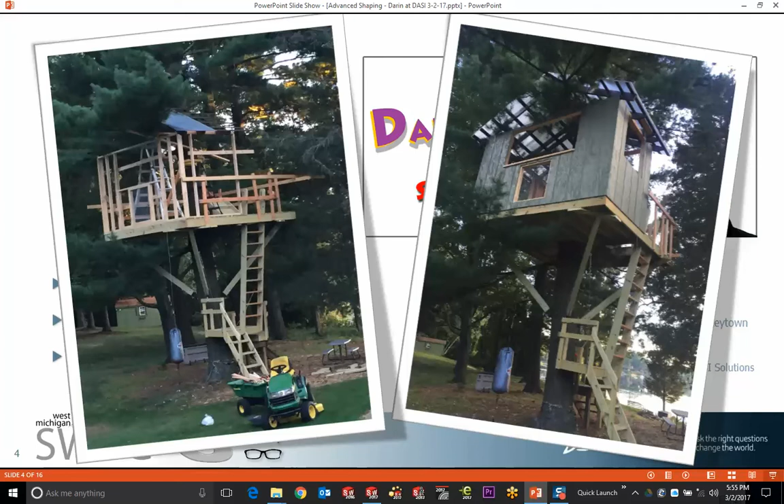I mentioned this last time, but basically I spent 2 months of my summer building this monstrosity. It's 12 by 12, it's a few thousand pounds, and it's 15 feet up in the air. I'm showing this because no matter what I do in my life, I always start in SolidWorks. So if you have access to it, even as a corporate customer, you do have the ability to have a home use license. As long as you're not starting Joe's Tool and Die on your company's license, you can use it, practice, and get stick time building anything you want.

Evident by the project waiting for me at home, which is my latest, a bathroom project. So lay it out, make sure it fits, just like designs you do for your companies benefit yourself as well. Make sure you've got things that are going to look good and are concepted before you actually go to production.

What we're talking about today is advanced shaping, in a manner of sense. There are several features in SolidWorks that allow you to create much more complex, or to use a technical term, swoopy shapes. It all has to do with what the goal is, but there are many ways to skin a cat when it comes to these situations.

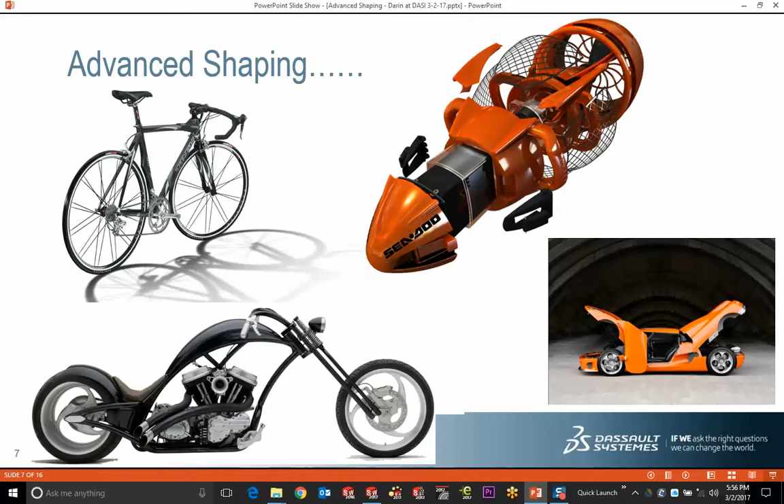So we can start with prismatic parts. You can work with a part that's got fairly basic geometry, and start to manipulate and change it using a variety of different types of tools that we're going to cover today.

The way I've got this broken down, and I'm going to leave some room for questions at the end, is we're going to start with what was actually in the request for this presentation, which is a little bit about multi-body parts. I'm going to talk about what they are, but also where they're going to be used in this more complex geometry creation. For those of you who aren't aware of what they are, I want to flesh that out a little bit deeper.

Now, sweeping and lofting are pretty classic tools when it comes to creating complex shapes. Sweeping less so than lofting, because it has some limitations. You're going to have more simplified geometry as a result of it, where lofting is basically open-ended.

Guide curves, profiles, as many sketches as you want to have in the circumstances there. Sorry, I just want to make sure we stay on time.

The Freeform tool is one of those tools where it's basically like what people think about when they're talking about surfaces or very complex shapes. You're actually pushing and pulling on nodes, on faces, and manipulating the geometry that way. Depending on what you're trying to do, that's a very effective way to do it. You can get a lot more complex results with a lot less work with that type of tool. So that's a very important one as well.

And then advanced filleting. Fillets and rounds are really always regarded as just knocking off the sharp corners type of thing, but the reality is there are very complex geometry tools in the filleting capabilities as well. So starting to get into things like variable radiuses and then class A tangencies. We've started adding those the last few releases with parabolic shapes instead of just radius shapes.

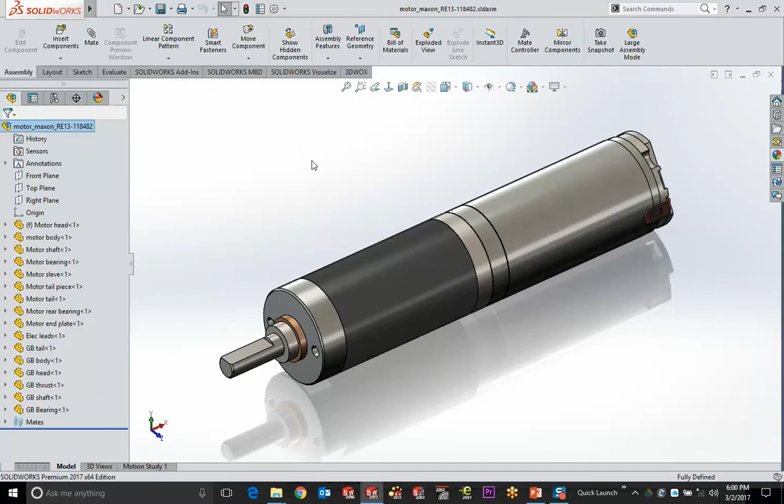But all components is generally what I'll do. Now we're going to change the name on this one. I'm just going to give it a quick name here, little fat finger on my name there, doesn't matter too much. By saving this, what we end up getting is the file that is basically the part file version of that. We call that Darin's multi-body.

The tree looks virtually identical. It still shows each of the parts. If we look at these side by side, you can see that even the material properties and colors were retained from the assembly to the multi-body part. But now I have a single file that I can manage, yet it still looks like an assembly. It still sort of behaves like an assembly, and it's just an easier thing to deal with.

Now, when we're not really dealing with just a file management circumstance for those purposes, we want to get into a little bit more of the complex shapes that you're going to get out of that multi-body. This isn't the most elegant example, but it's something I want to lead in with here because it's definitely one of the reasons multi-body exists.

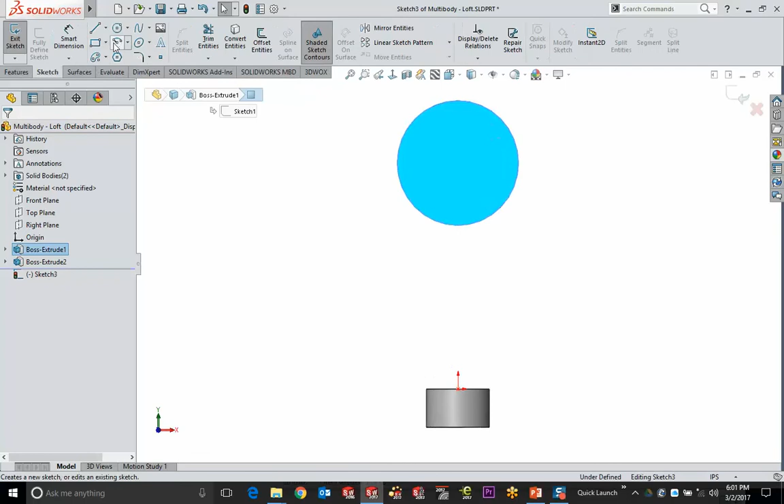To do a multi-body part, it's very simple. You extrude two or more features that simply don't touch each other. When you extrude a feature, if I happen to be on this face and sketching and drew whatever, by default merging that feature to any touched features is going to automatically happen, but you can always turn off this merge results feature.

What that would actually leave me with now is 2 individual bodies, as you can see right up here. That always has the ability to go ahead and take that body and move or copy it. You'll see that they're not touching or connected to the other, so we're going to get the ability to see and position these things separate from each other. Yet it is still a part file.

Well, one of the reasons I use this for complex geometry is that sometimes you know where you're going to start and where you're going to end, but you don't really know what's happening on the inside of it, what's in between.

So this is a situation where I'll build something and then use lofting or sweeping to connect those objects. A classic example of this is the lofted feature, which we'll talk about more as we go, but it's basically blending of dissimilar profiles.

Now we have circle to a circle here. I'll make this further complex as we go, but when you have just extrudes like this, you only need the face as a profile within this loft. You don't need sketches or other curves. A face of any part will work just fine, and I'll show you that as we go.

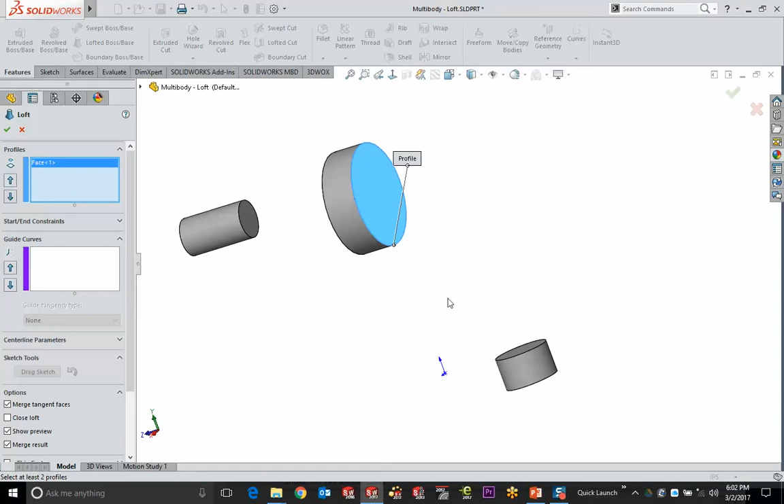I'm going to pick these roughly where I want them to blend, in this case the lower central corner, so we can get those where we want them. You can even change this manipulator to align those a bit more appropriately. When I have rectangular geometry, you'll see the results much more easily. This is just going to blend the shortest distance between these multiple faces.

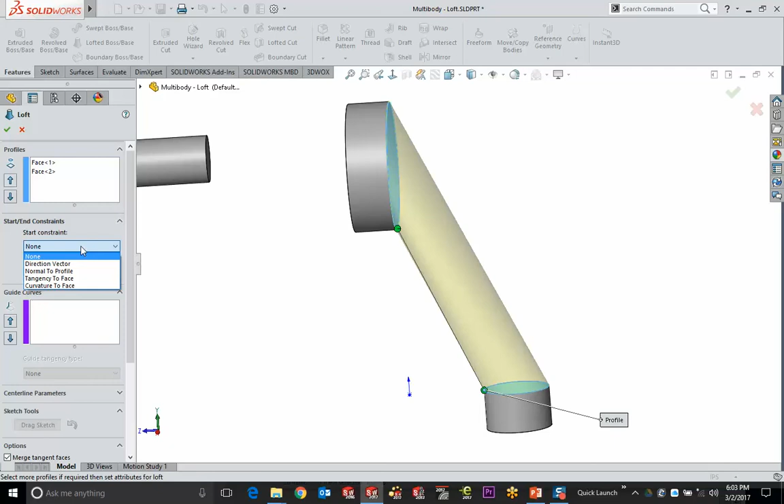So this is really where you get into this area called the start and end constraints. When we're dealing with this, we have choices of not just touching face to face, but without using guide curves or any other sketching, we can tell it to be directional to any type of flat sketch or edge on the part.

There's no flat edges here, so normal to profile is always a very good one. This allows us to stay perpendicular to that face and even weight this so it has an angle of attack that's appropriate based on this little weighting feature here.

Usually that's set to 1. It gives you a nominal angle of attack, but that'll make sure it hits this face perpendicular. Now if I set that on both sides to normal to profile, it starts to resolve itself even further. Just by pulling this up a little bit, your preview gives you some really nice looking shapes.

We say OK to that, and that's just going to make the transition of the two different sized circular or cylindrical features blending to each other.

Now there's another way to do this. What I want to do on this one is add a bit more of a feature, just using a little guide curve or a sketch. Actually, I don't think I've got the guide curve on this one. But you can use these features called center lines. A center line allows you to make a path just by having the central path it needs to follow.

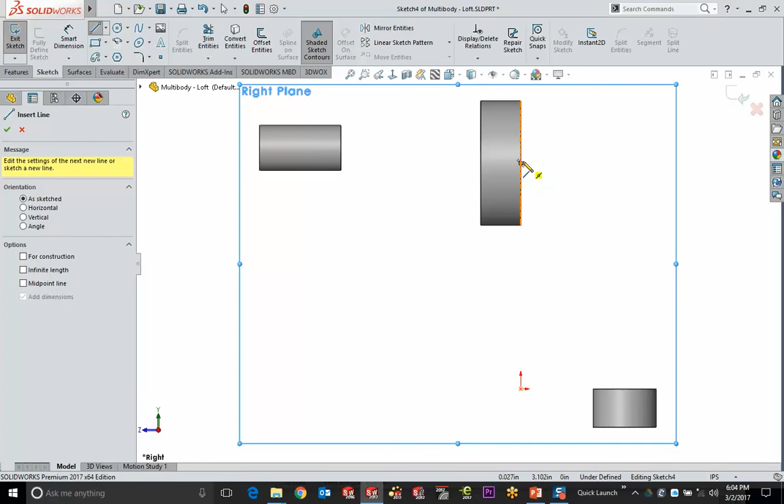So if I want it to follow around like this, maybe come back like this, and even come back around this direction, that's pretty good right about there. Then we'll just go ahead and make a line at the end. So if I want to put these lines and arcs in particular positions, when we say OK to this, I can now do the exact same loft as before, profile to profile.

But then what we do is simply click centerline parameters, and I pick that path, and it will have to follow that as if it's a sweep. So this is sort of a hybrid of sweeping and lofting. We have dissimilar shapes, and they have to follow this path as they transition from one to the other.

Again, not the most elegant thing, but that sketch is editable. It's completely something you can manipulate. With my Instant 3D turned on, that would help me, and it gives me opportunities to make some changes to this sketch that will move that around.

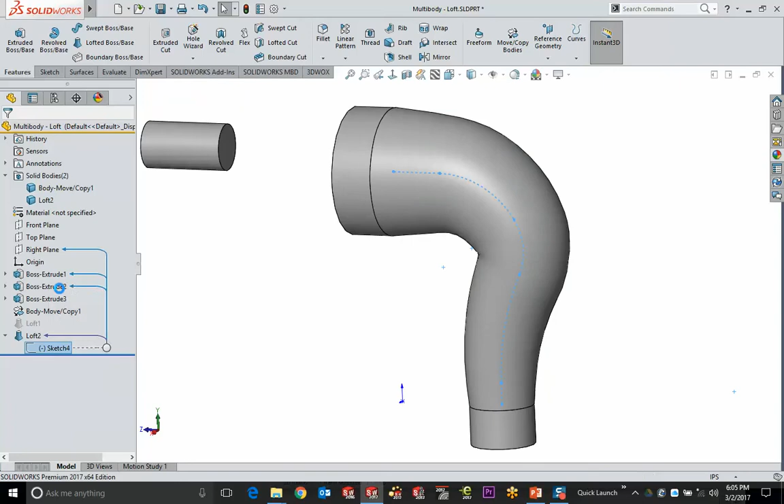All right, let's just do it that way then. As we drag that around a little further, that's going to drag too far with the one we're doing right there. You just have to play with your tangencies. Sweeping, lofting, spline features - that one's a little tight, so we're getting jammed up on the shape there. But when working with these freeform shapes, we'll just undo both of those. How about that? Good enough.

The next couple of features, multi-body was just kind of thrown in there. It was a little bit off topic, but good enough on that one.

Sweeping is really where we start to hone in on some of the power of these complex shapes. All the examples on the screen are ones I'd like to show you just to give an idea of how they're created. But these aren't isolated methods. The shape I'm making is just an example. You can really be very open-ended with these particular shapes.

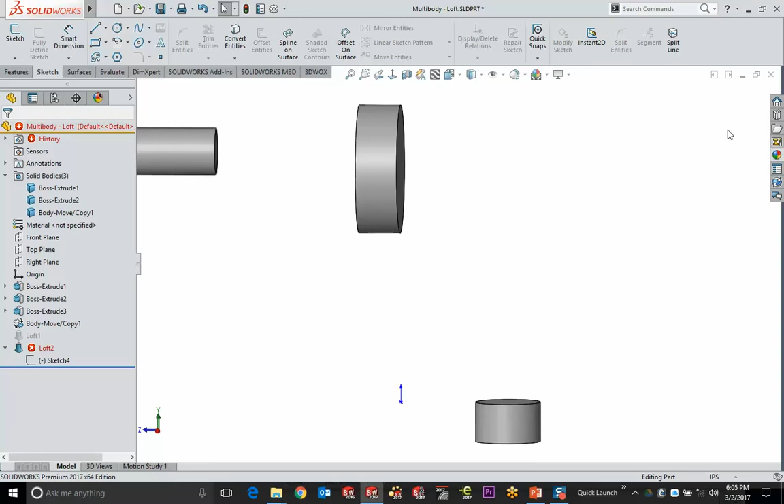So the first one I'm going to hit is this one over here. It's called a projected curve. What users don't always realize is that as you're working on things, you can create the paths you want to follow or the features you're trying to create just by combining existing geometry around this part.

Let me find the one I'm looking for here. I want to go ahead and rename that one while I was in the middle of it. So what you're typically doing is combining sketches from multiple positions. Just for the sake of time, I've got a couple of sketches already created. Basically what we're talking about is a sketch on the front plane.

So I have a shape, and when you look at a wire or a hose or something in 3D space, looking at it from two different directions will generally give you what those shapes happen to be. I'm actually going to do these from scratch, because it'll make a little bit more sense for everybody.

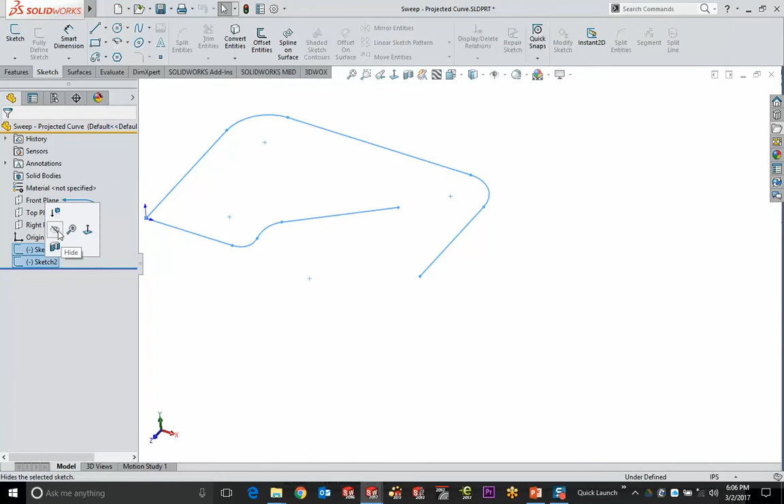What I'm going to do is go to the front plane, and on the front plane sketch what this feature would look like from the front position. So I'm just going to draw it across, using just a few arcs here. I'm going back and touching that point, just so you know.

When you draw an arc and go back to a line, if I go back and just touch that point and pull away again, it turns into an arc automatically. No hotkeys necessary for that—a little bonus. So this is what my feature would look like from the front, for example.

Now, if I go to the top plane instead, this is a completely different look for the shape. What I want to do is make sure these sketches overlap each other properly. So as I put each of these lines and arcs in, I want to make sure they stay within each other's bounds—in other words, this one isn't past the end of that one. Whichever one's shorter is going to truncate the result.

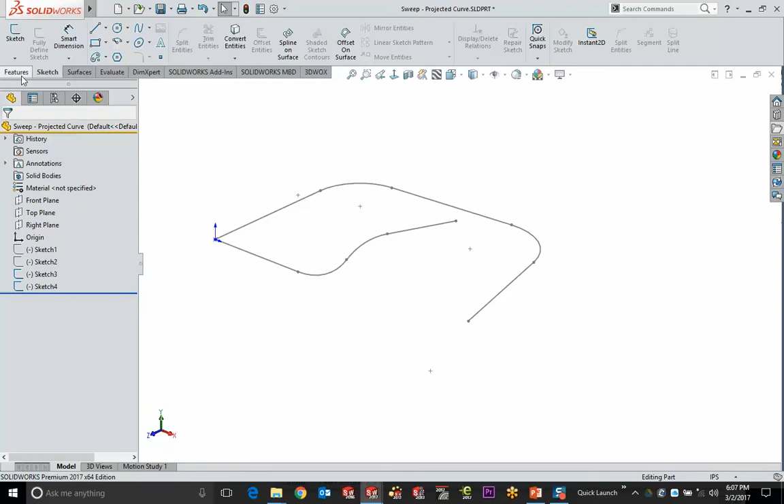What we're going to do is take these two flat sketches and combine them together to get a 3D result. This is under the Features tool and under Curves. It's called a projected curve.

Now, there's a couple of ways to do this. There's sketches on faces—we'll do that one next—but then there's projecting one sketch onto the other. Just by picking each of the sketches, you get a great preview of what the 3D result happens to be.

So if we take a look at this from a top view, you'll basically see the shape from that sketch. If we look at it from the front view, you see the shape from that sketch. And what that all gives you now is the 3D resultant, which is this complex curve in space. It can be much more complex than this, but it's a great example of how these things get combined.

Now, with SOLIDWORKS 2016, we can jump right to the sweep very quickly here. This is very cool—when you do a sweep, we no longer need a sketch profile and a path. You can switch to circular profile and just define the diameter. All you need in that case is just a path. So if I make that 1/2 inch, that's going to give us our hose right away.

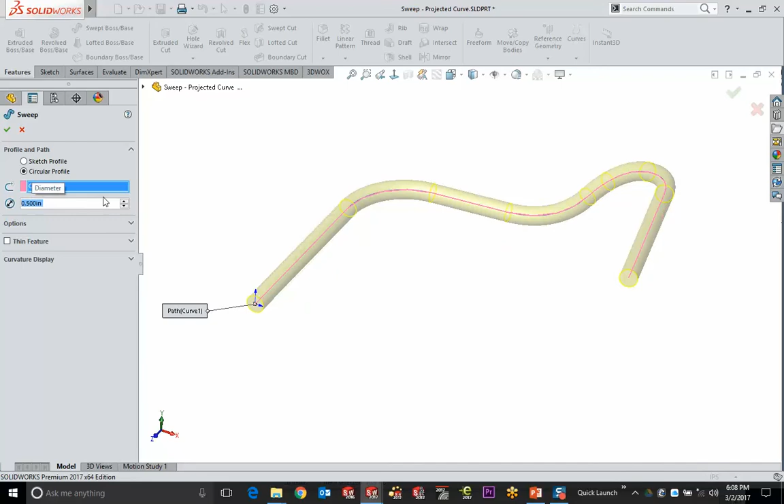Everything we've done is based on those sketches. So if I take this sketch and start to manipulate it or make changes, that gives us the ability to edit each of these features. If I go ahead and start pulling that up or make it a little bit flatter, that's going to change what the 3D result happens to be. But in every account, what you see from the front is what it looks like from the front, and what you see from the top is what it looks like from the top.

So if you're not really comfortable with 3D sketching to make those kinds of things, that's a very effective way to get that feature done. When I'm getting a little bit deeper into these kind of things, the projected curve is a great way to do it, but I also like to project curves onto the faces of parts whenever I can.

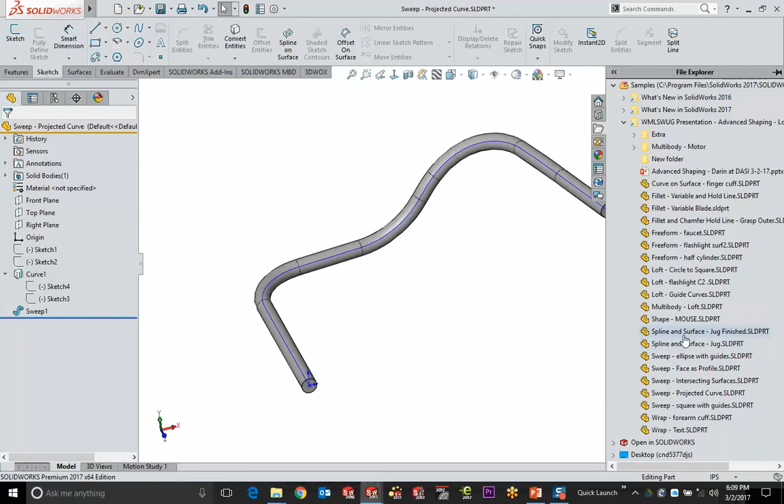So this is a sketch in the middle of space. What I want to get to on this next one here is actually going to be more of a face that's in a complex shape that we project a sketch directly onto. So on this particular one here, we're going to go ahead and bring up this part, which has got a fairly complex shape.

Now, in order to jump to the chase on this one, I've created a sketch here, and I want to show you what that sketch looks like, because it's really just basic geometry. I've offset some edges, and I'm using just some fillets to round off between each of those. The sketch itself is on the front plane behind the part. It is just a basic 2D sketch.

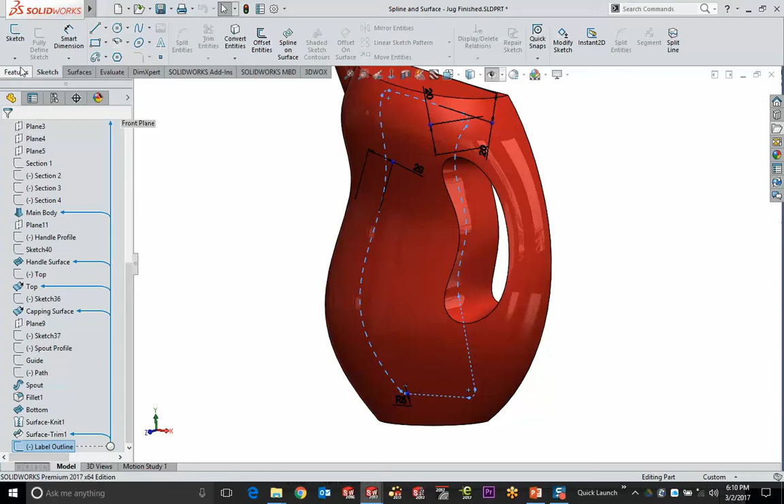Under the features, curves, and projected curve option, what we're going to do on this one is project that sketch onto a face. So that label is going to be projected onto this complex face, and you see that it maps the topology of that face as a result. So a more complex way to get a sketch and a curve in space is now going to give you a curve that actually sits there and wraps around the top of the topology of that geometry.

Once again, if you go ahead and sweep, you can jump right to it by hitting the profile, having a circular shape to it, and then just clicking on the path, which is going to give us this entire feature. So we'll throw a little bit of a ridge around that, and then that ridge is going to give you a label or an emboss.

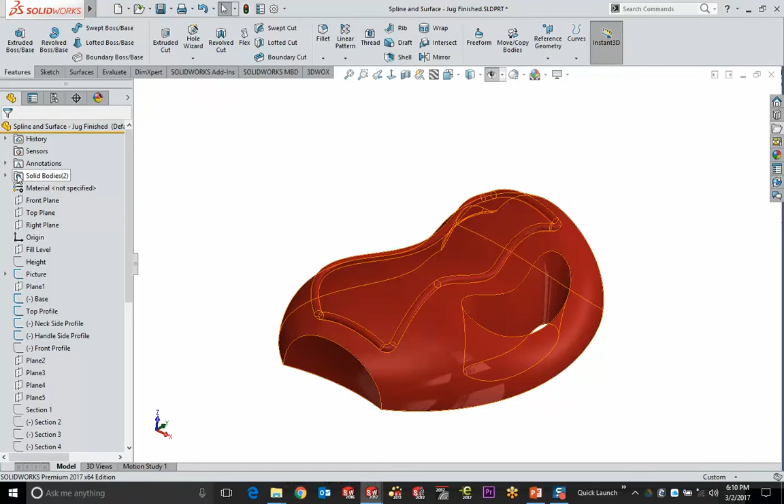Now, this doesn't have to merge together. If I really did this in a way that my sweep is not going to merge with the original geometry, which after I've done it, it's going to go ahead and merge. But if I reduce that or remove that, what we can basically do is use that to get the results of having this crazy wire in space.

So all you have to do is have the shape of the face or the topology, or a headliner or a door frame, and you can build the trim or the types of features for those different objects.

One that I've shown quite a few times, and you may have seen some different examples on the web, is this kind of a spring right here. Anybody tried to make one of these before? Does anybody have a need to make one of these? Because again, I'm just going to throw it at you, but I want you to see what this type of geometry actually looks like. So with that spring geometry, what we're basically getting is the method that we use to create this curve.

Now, what I've got here is just some very simple sketches. We've got an arc with a center line. That's going to be a spherical type of a surface. I have just two other lines, and then I have another one that's fairly crazy. I'll bring that up at the end.

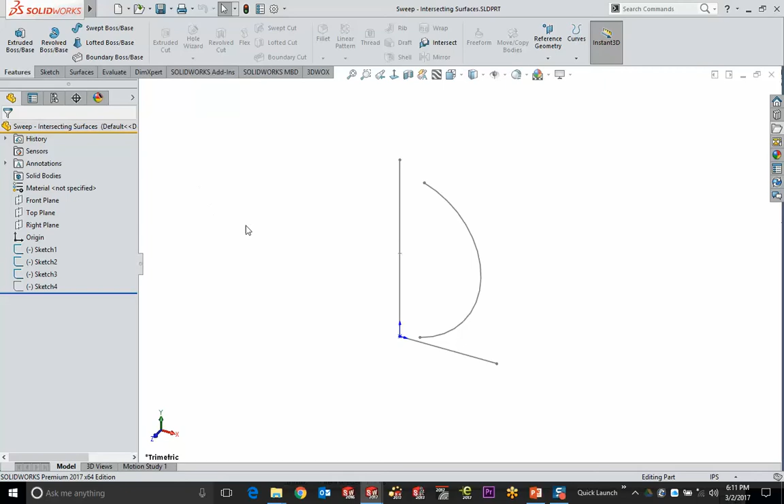But what I want to do is make a couple of surfaces and then intersect them. And where they touch each other can also give you a compound curve. So by taking this simple center line with an arc on there, I'm just going to do a revolved surface. Simple 360, but it gives you that zero thickness surface geometry.

The next sweep is a little bit more complex, but it's all just based on settings, so not hard to do. We're going to sweep really intricately a line along a line. Yikes, that's really scary. However, sweeps aren't always just in the base settings.

When you're looking at guide curves, that's another way to inject some other control points, which we'll get to as we go. But there are just some simple options here that actually allow us to change how it follows the path or how it twists as it follows the path. So this has an option called Profile Twist. And if I set that to be a specific value, direction or whatever, in this particular one, what I want to do is just specify a twist value, which can be done in degrees, radians, or just number of revolutions.

So by giving it 1, you'll start to see what it's going to do. Start to bump that up a little bit. I can make that sweep along a line and twist as many times as I want to, effectively giving us a helicoil. Now when all is said and done, I have these two surfaces sitting in space.

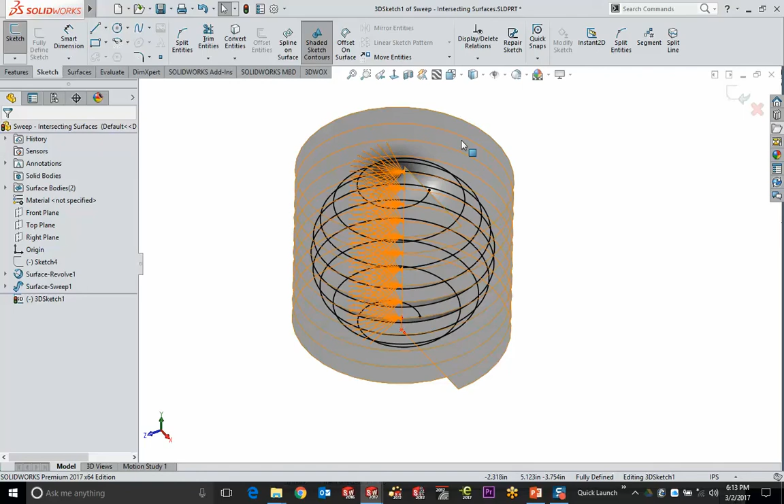All you have to do is go under Tools, Sketch Tools, and Intersection Curve. By picking these two surfaces, what it will do is give you the intersecting result as a 3D sketch. Now when that sketch is done, of course, nothing else is necessary because now we have that circular profile.

So if I just go ahead and hide both of those surfaces, we can easily do that sweep operation, grab our curve, and just give it a circular profile.

Same kind of thing here. We'll do a 1/2 inch on that one. So that's all it takes to make that crazy geometry.

Now, to get a little even deeper than what I just did right there, what I'm going to do on this one is go back to that other sketch that I had there, because basically what I've got here is a couple of surfaces showing.

This one I do not want anymore, so we'll get rid of that one. But I had another sketch waiting there, which was a center line and just some arbitrary spline geometry, just to give you an idea of just how nutty this can actually be. This is actually the one I do not want. We're going to keep this guy.

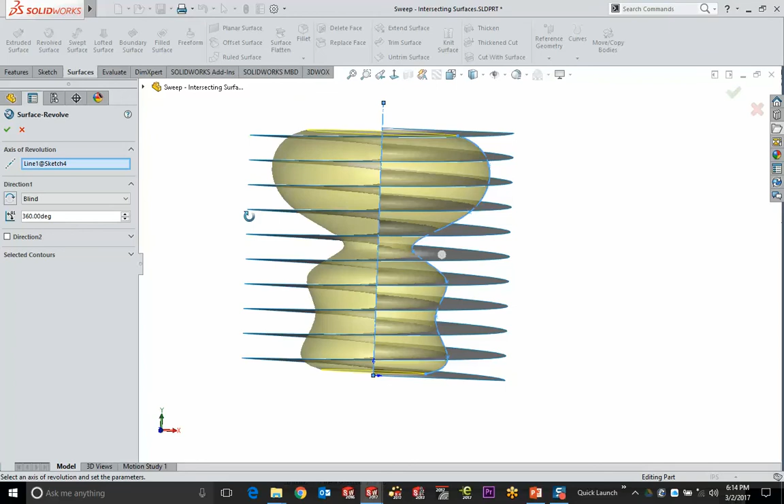So by taking this feature and doing the same type of surface revolve, what we essentially get is not spherical, but very organic data just based on a simple spline profile. But it's the same kind of operation here.

Grab both of your surfaces, you can do this in either order, under Tools, Sketch Tools, and Intersection Curve, and then that will give you that resulting geometry. Doesn't matter how you do this, this is just two examples of very, very many ways that you can do this for any type of desired result.

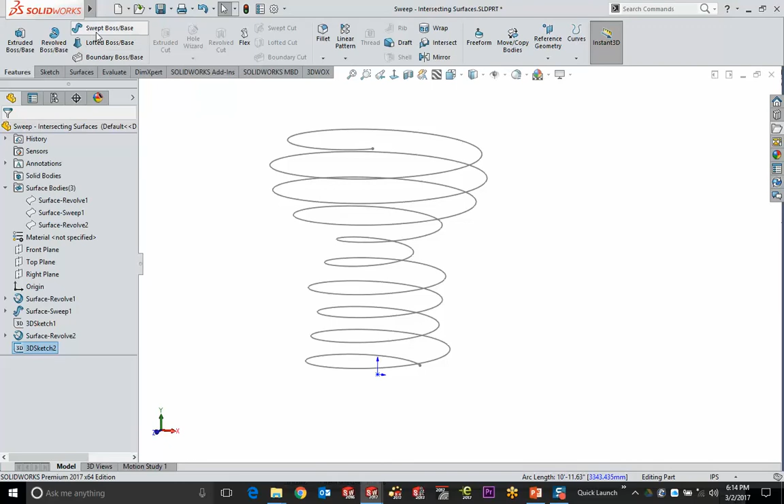But that's a pretty wild looking sweep path right there. I don't really know of any other way I could pull that off other than this. It really does have to be the curve intersections, but it creates kind of the spring I saw on the back of my '82 Cutlass.

Not even quite like that, but you get the idea of what can be done here. This is round, but it could be hoses and other types of things in space as well.

Now, SOLIDWORKS 2017 added a new feature here, and this is a part that I typically show, but it really shows one of the limitations removed from sweeping that has to do with just the faces that you select in order to make a sweep.

So with the one that I have here, this is a pretty simple piece of geometry, but like the circular profile no longer having to be sketched on a plane to be used for any type of sweeping operations, this is a situation where if you have the guide curves that are necessary, all you really need to create any type of sweep is just a face.

I don't need to pick the face, start a sketch, convert entities, and make a sketch. It's just another feature to have to manage and possibly break if things change. But all you have to do is just pick a face, start a sweep, and we just need a path for that. So the face is enough definition to get you to that point.

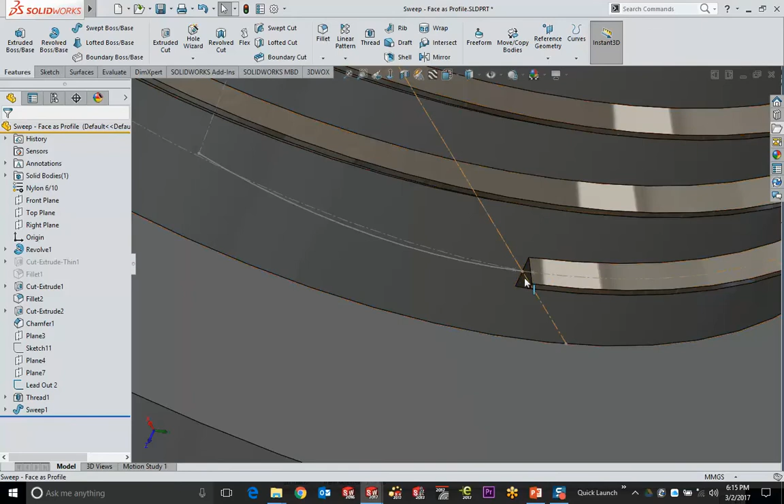So definitely worth noting there, but something that is easy enough to do requires less input to make that. So once again, a face, I'm just going to run a sweep, and then we'll use a curve to make that feature.

Any questions so far? Anyone at all? Anyone at all?

Okay, good deal. Yes, sure. Can you do the same thing with tubing? Sure. So tubing with any of these would totally be possible. What I usually get into when I'm thinking about tubing is ease of use.

Now, what you can do on a sweep is you can actually draw two circles and have them nested within each other and sweep that, but that's more complex on the part.

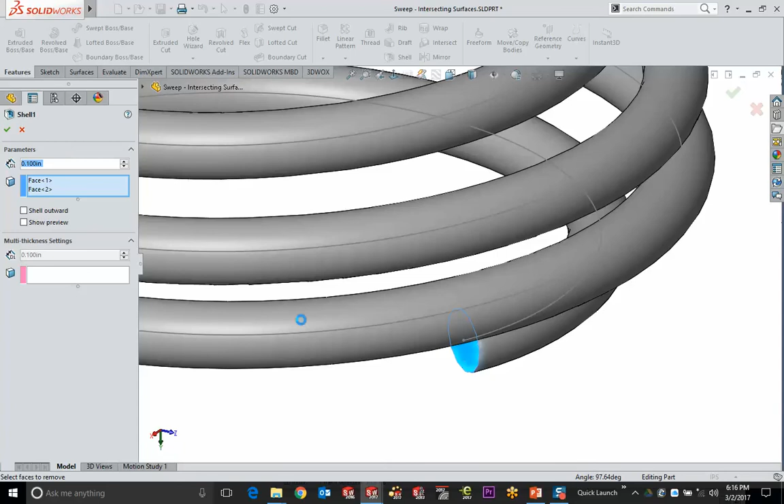Easiest way is to just make it solid, come in here and pick the end faces, and just do a shell operation. And that way, if I just go ahead and give it a 0.1 inch on this one, that's going to give you the tube that you're looking for straight through it.

A sweep will compute faster because there are fewer faces, and a shell is a really simple, purpose-built tool. So that's the best way to do any of those.

Keep it simple. It's the same philosophy I use when talking about fillets. I don't put them in sketches, sometimes you have to, but otherwise sketches should be as simple as they can be to create the most amount of geometry.

You can't suppress a sketched fillet, you can only suppress fillets added to a part, so performance is an issue. I did shell twice on that one, which is why that happened. But you can't suppress a fillet for performance sake if it's built into the sketch, so I always do those as a separate operation.

Any other questions on the sweeping stuff? All right.

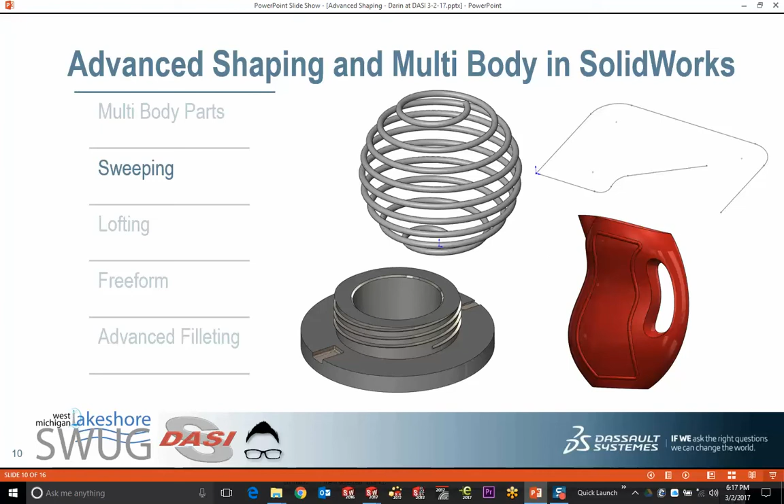Lofting is a bit of an animal of its own, and I showed you that a little with the multi-body part. But the basics for a loft are blending dissimilar cross sections. It doesn't matter what shapes you draw - the more profiles and guide curves you have, the more control you have. The sky's the limit with something like this.

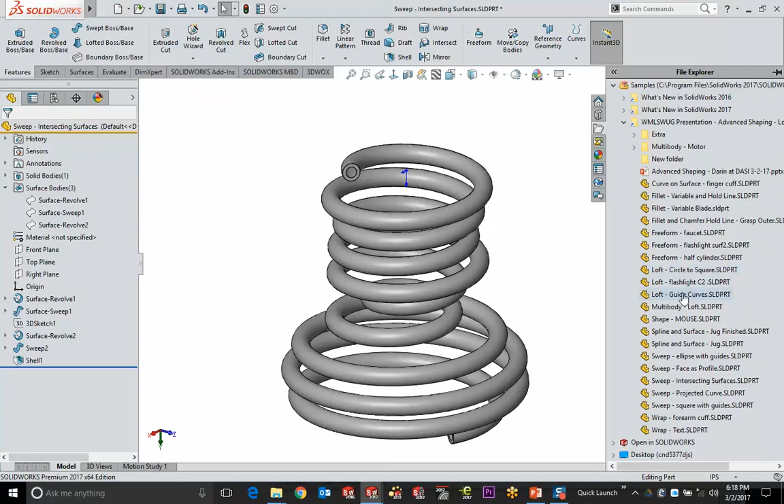I'm going to show you this mouse piece. This is a SolidWorks 99 file that's been bouncing around in my archives for quite some time. It's got a few different loft pieces, but this actually had a feature in it.

See this feature here? It's errored out. It's called the shape feature. Anybody remember the shape feature? Tell me how long you've been using the software.

This is SolidWorks 2017. If I click on the shape feature and hit edit, it says the shape feature is no longer supported in SolidWorks 2010. So this file is so old it has a feature that hasn't been in SolidWorks for 7 years - it's been replaced by the Freeform feature, which I'll show in a bit, but that's not the reason I brought this file up.

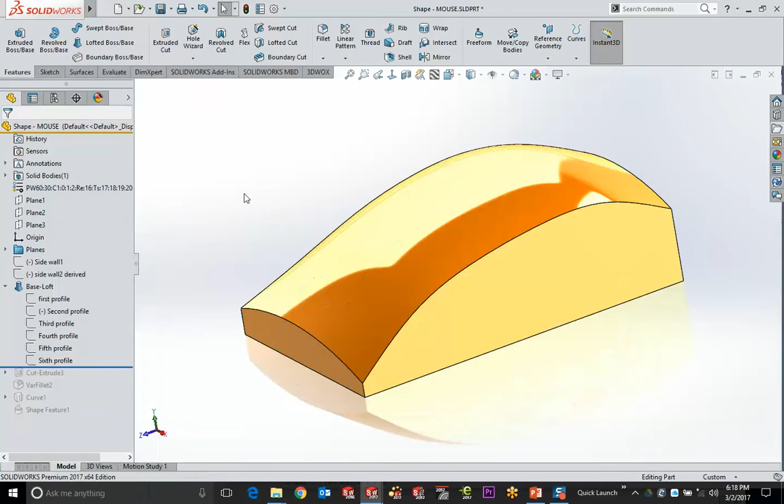What we're getting on this file is a real example of the old days of lofted features. This is a mouse, not unlike the Microsoft mouse I'm using right now, built using multiple cross sections. All the user did was sketch each and every one of these sketches. So the feature we're looking at is the trimmed version of a very ugly looking initial shape, but the purpose was to blend these dissimilar shapes, sketching as many as needed to make this happen.

That's a pretty typical way to approach a loft, though it could be more work than you need if guide curves will actually do the rest of the job in something like this.

I have another file we'll bring up a little later for filleting, but this particular feature here is also a lofted feature.

The difference is somebody made that with 2 sketches instead of every interim sketch. It was either blending together based on the dissimilarities between them, or we can put guide curves between each of those, which is where I'm going with this next.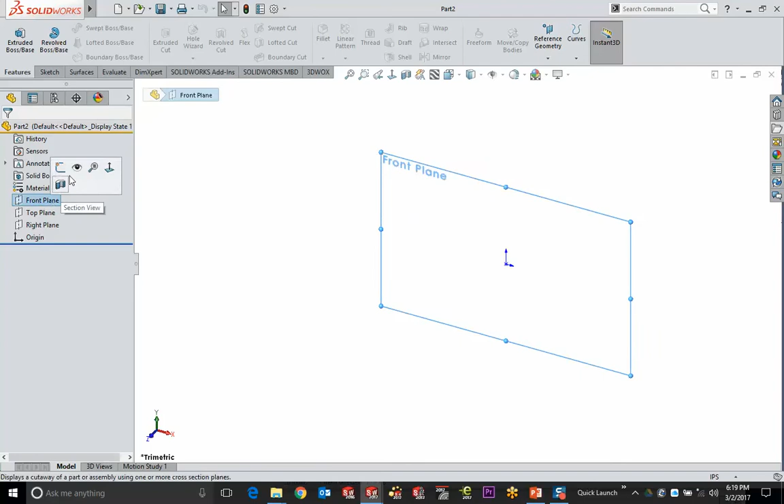This is an example I show often because it gives you the open-ended nature of what this tool actually does. I want to sketch on a few different sketch planes. First I'm showing the front plane, and then with the control key held - in case you didn't know what I'm doing - I'm going to pick and drag a visible plane, which automatically fires up the reference geometry plane tool.

When you control pick and drag a plane, it makes a plane parallel and offset, then fires up the tool automatically so I can add additional instances if I want. That's the quickest way to get a plane copied in that manner.

Now with these additional planes on the screen, I just want to draw different things on each of those. On my second plane here, we'll start a sketch. For this first one, I'll use some spline data. I don't use the regular spline tool as much as I used to - the style spline is a little easier - but with what I'm creating right now, this is going to work for our needs.

Now, for those of you who haven't used SolidWorks 2017 yet, who has not used 2017? A few of you yet.

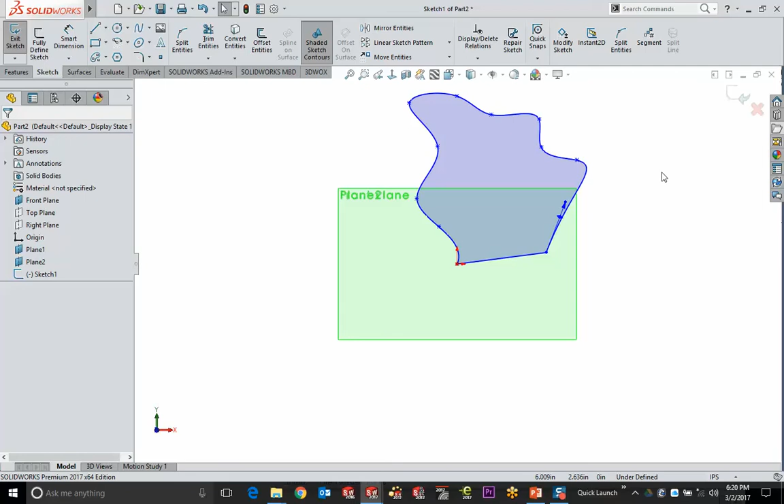Service Pack 2 was released over two weeks ago, so we're right in the middle of the release cycle, which makes it a safe time to go ahead and install.

So what I've got is this sketch on the first plane. Now on the second plane, I want to sketch something specific, because it addresses a limitation that a lot of our competitors have—when you do lofting operations, each profile has to have an equal number of vertices. So on this one, I want to make sure that's obviously not the case, just by putting way more points in than I need to.

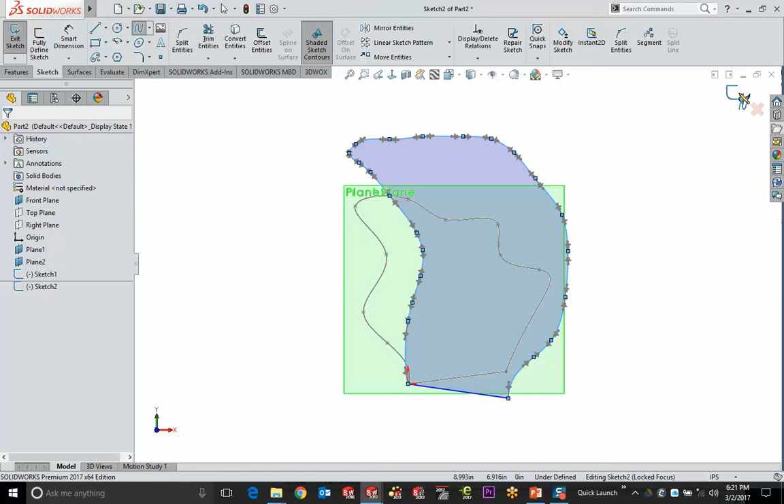But again, another shape. Now, what I was mentioning about SOLIDWORKS 2017 is this thing called a shaded sketch contour. That's why my sketch profile, when closed, fills in with this shaded feature. It's a nifty little thing.

If you haven't come to one of our What's New presentations, you'd see why we do it there. But a little sidebar here, since I have a captive audience: when you're drawing sketches now in 2017, you get these profiles and they shade as you go. So as you start grabbing other features and sketching over top of those, you'll get doubly nested, which further darkens the sketch shape itself.

Now, why this is important is because this is a fully underdefined sketch—kind of a weird term, but it is a fully underdefined blue sketch. However, when you have shaded contours turned on, I can grab the shaded region and move it without having to trick it with the copy, no-copy method. It's just basically there. With it turned off, I'm just picking in space, so I get a window select.

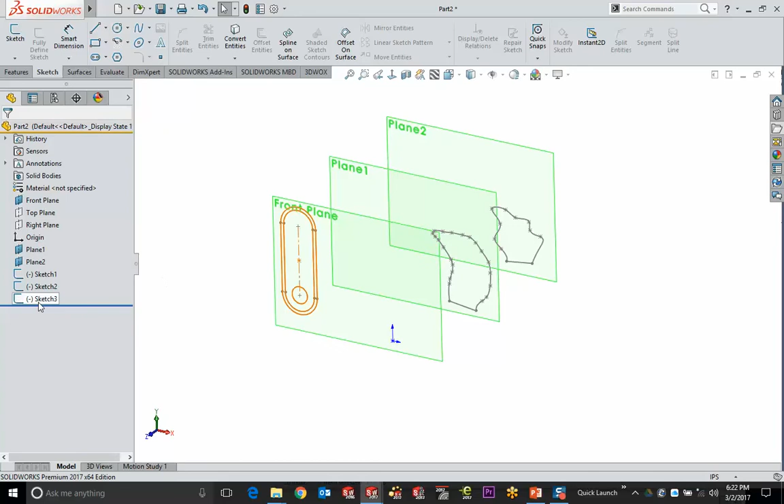But it enables you to grab the contour you're looking for and even do operations like a bulk select for an offset sketch. So I can do an offset, and now I've got this triply nested thing happening. So pick the profile you want and it'll move around. And then the Alt key allows us to pick further profiles. Not what I'm going to use for this one, but I just wanted to show you what that looks like.

What I want to do on this last sketch plane is sketch very similar geometry—you'll see why I'm using lines on the bottom for all of this. But I'm going to use a 3-point arc on this one, which is clearly not the same as the two splines we've used up to this point. All right, good enough, I'll leave that one on.

So what we've got now are these different profiles. Now when you're doing a loft raw like this, you pick these where they're going to blend. So we hit the loft button. I'm going to pick them in their lower right area—not necessarily right on the corner, but that's definitely the nodes we want to match up. And you'll see that it gives you the blend of these dissimilar profiles at the shortest path from one to the next.

Now the shape itself is phenomenal. It's pretty unmanufacturable, but in these times with digital manufacturing and 3D printers, the word unmanufacturable isn't quite what it used to be. So internal details can be made. We can even do that with metal and carbon fiber and still produce a strong and usable part. Now the sketches are what control all of this.

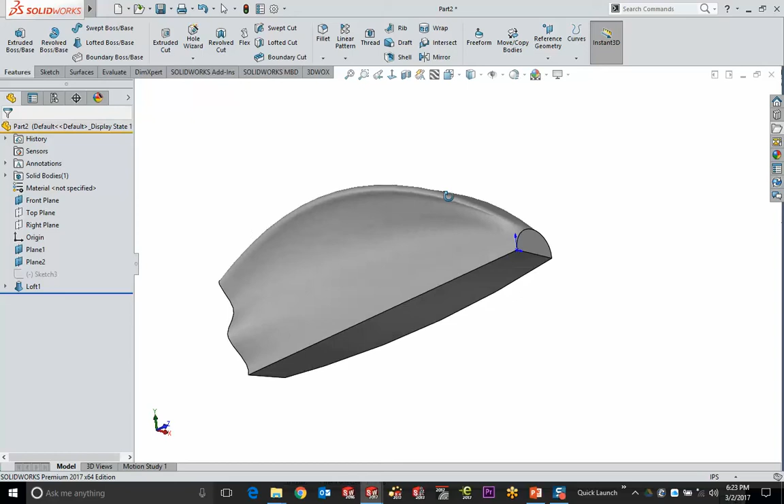So if I come in here and start grabbing sketch geometry and dragging things around—a little bit of an issue with my Instant 3D today. I don't know if you're noticing that, but I should be able to drag that stuff around as I'm working on it. So yeah, it's not giving me what I'd like. There's another reason why service packs are fun.

But in that respect, what we're getting on this one here is—oh, that's what I wanted, not picking the sketch. We start dragging on that sketch feature, and what that's going to do is give us updates to the profile. So everything we do is based on these sketches. By picking on the feature and grabbing the sketch nodes, you'll see that it updates the loft itself.

Can it automatically go into sketch editing then? Is that what you're saying? For what I'm having right now—well, I'm on 16, so I don't know. It would do the same thing there. Yep, in other words, if I click on that, I'm able to do a sketch alteration without having to jump into the sketch. This is the key: Instant 3D, this button right here.

With this button turned off, everything you do, I pick on the feature, I'm picking it, but I have to double click it to bring up dimensions. On a dimensionless part, that doesn't really make much sense, but if you double click it, it brings up dimensions.

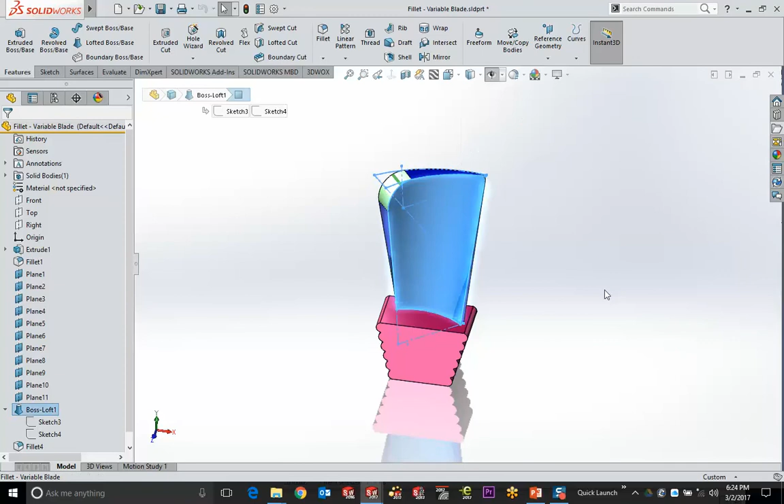With Instant 3D turned on, a single click will bring up the features of the sketches, and it also allows you to grab onto these nodes of the dimensions and drag them out in real time, so I can get changes just by pulling features around on screen. With Instant 3D turned off, you double click the part, double click the dimension, change it, and then hit rebuild. So Instant 3D jumps right to the rebuild when you're done with things, but it also enables those nodes on any dimension that you're going to want to modify.

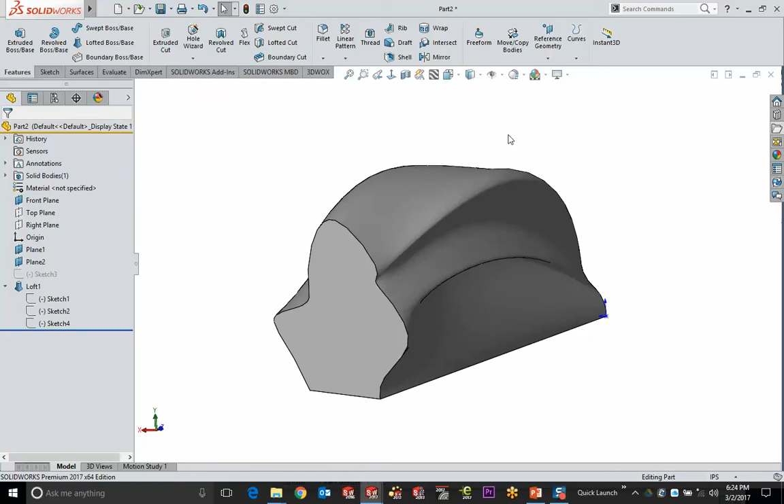What's happening here is that I've used sketches for a feature, and this will be true anywhere. By picking the feature with Instant 3D turned on, those sketches become active, so I can easily go ahead and pick and pull those points around as well. Now, if there were dimensions there, I could just massage those numbers.

Now, kind of back to what we were talking about with the sweep, this is a part that I show often, and I basically say, look, I'm just making the outside of the skin, but every surface - and I deal with automotive people all the time - they give us one side of it. Why don't they give us the thickness? They want accurate parts, so they give us both sides.

Well, here, I have a complex face. All I have to do is take the opposite side and shell the rest of it away, and then what I basically end up with here is a sheet solid. It is something that has mass, it has volume, but it has a thickness to it, and it is still a solid, but it has that surfacing quality to it.

Now, this is just the blending of the shortest distance between these profiles. If you want to control this further, what you can start to do is add guide curves.

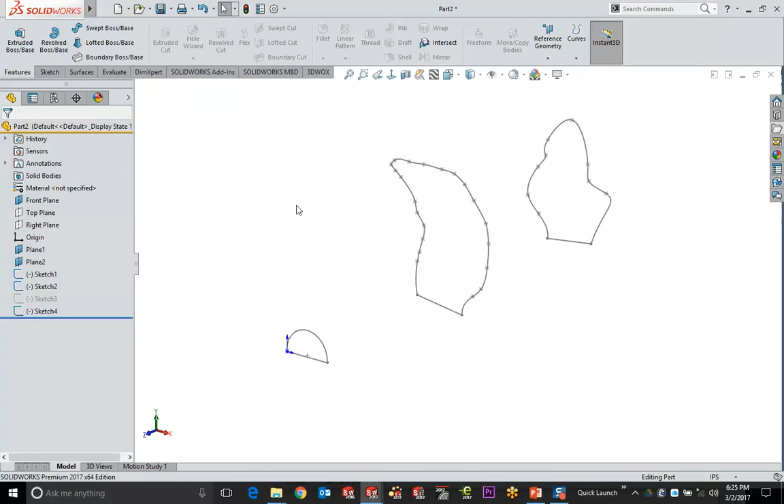So on my top plane, I'm just going to go ahead and start sketching some splines. Now, for the one we're working on, I sketched this line at the bottom on purpose so that the lower left-hand corner of this was all touching the top plane. As I go ahead and draw this, I can connect each of these nodes as I go through. That'll give us a nice flat sketch, and that will control how those corners blend to each other.

But we also have a sketch tool called 3D Sketch, and that doesn't rely on sketch planes for its definition. If I go under my sketch tool, there's a flyout, and you can click on 3D Sketch. This is how most people create wires, pipes, and tube routing, by sketching in X, Y, and Z directions, not single flat plane directions.

Now, with this tool turned on, what I can also do is draw splines in 3D space. So if I want to start at a point, I can pick any point I want, and you see it's actually got a flat plane because that's the orientation we're in. By hitting the Tab key, I can switch the orientation of that plane - now I'm on the XZ plane, now the XY plane, and now the YZ plane.

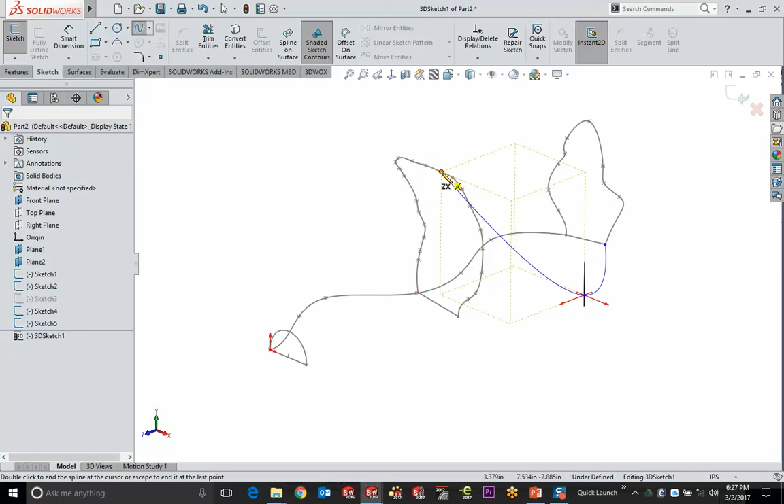With this, what I'm going to do is just click an arbitrary space, because no matter where you are in a plane, you can go directly to any point you want in space as well. You can see the delta box there showing the XYZ changes. So all I'm going to do is connect these points and finish that one, which gives us a spline that I can move in all kinds of 3D spaces that are no longer controlled by a single 2D sketch plane. It's a real fun way to deal with things, by the way.

Very cool. Now that said, I have two guide curves here, so when we go ahead and run the lofted operation, by picking where they're going to blend, you're going to get the exact same preview that I had before. But once we click in guide curves and start to add each one, we're going to start to drive those lower corners individually. Because this is a spline and a line, it can take many, many shapes and forms.

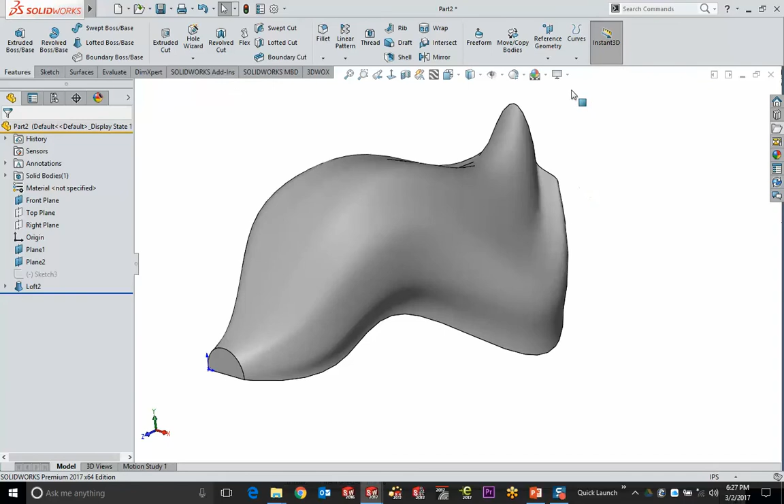So by clicking this opposite side, the line at the bottom is still going to be a line between the two splines everywhere, but it is very variable based on the 2D and the 3D spline that we're using to drive those. So we say OK to that, and it gives us a really nice look to this, maybe get some shininess or shading there a little bit better.

But that is the same operation. I'll pick these faces, and then we will shell that out and hit the X button instead of the green check mark. That will give us something talking about minimum bend radiuses, which we'll just ignore and barrel past. This will give us a nice, tidy, thin-walled, but very accurate part. And if we go ahead and start doing some section views through that, there you go, kind of validate that through there as well.

So it is a nifty function which really takes any type of limitation or rule completely off the table with this. No software rules for number of profiles, number of sketch guide curves, or center lines added to this. So lots and lots of capabilities there.

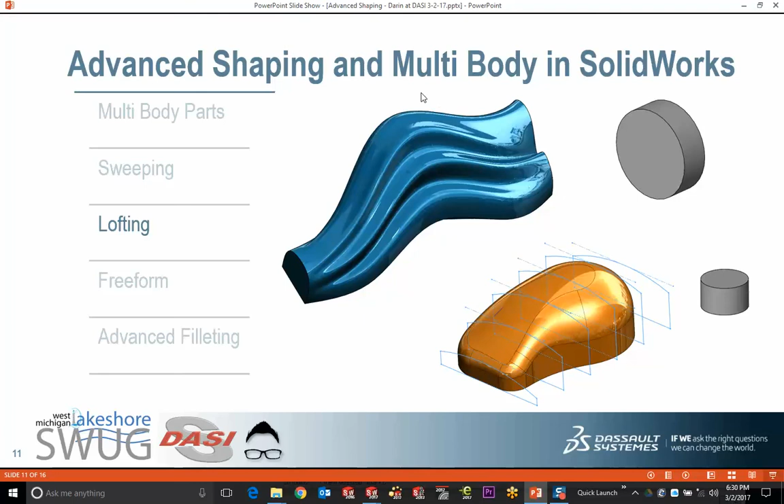Anybody have questions on lofting, or anybody doing lofting that would like to make a comment? All right, everybody's good, John's running good too. So lofting, however, is the best possible way to make any complex shape if you have no other options.

One of the more fun ways, and the way I find that people, users don't know is there - and you don't know what you don't know, so that's definitely valid - is this tool called Freeform. Now Freeform works on any geometry. Doesn't matter if it's imported data or native data. Doesn't matter if the face has 4 sides or 20 sides. You pick the face and we start pushing and pulling on the nodes.

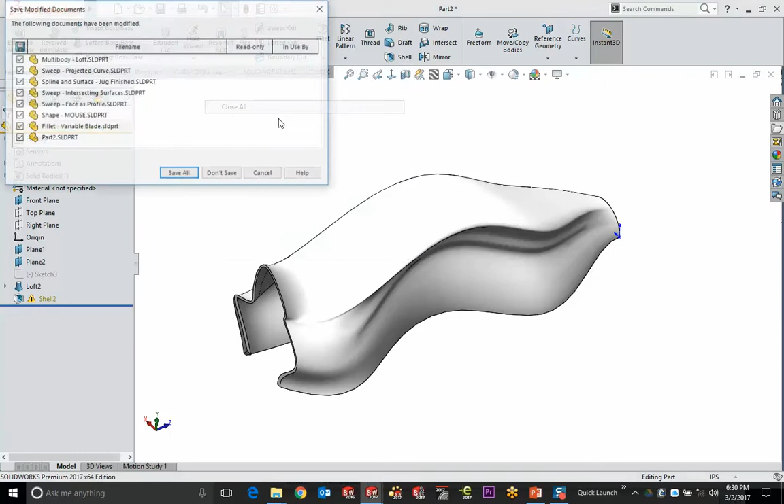So I'm going to give you a couple of examples, one of which is this nice little flashlight handle, and then this unassuming looking part here, this little soon-to-be more complex looking Kohler faucet. So we'll hit each of those. But Freeform in and of its own doesn't matter what geometry you use it on. It's really just about the situation and the outline geometry for that.

So I'm going to start off with just some basics about how Freeform would work. Now this is a very simple thing. It's just a 3-point arc, and we've just extruded it as a surface. So there's really nothing to it.

The tool Freeform would appear by default if you're using default toolbars from installations. Many of you are pulling toolbars from previous installations. The good part about that is you don't have to re-customize your toolbars. The bad part is that new buttons won't be on those toolbars, because 2017 has new buttons and 2016 wouldn't have been aware of those. So there are some cases where you're not going to see these buttons where you need them.

But Freeform for me appears on my features toolbar, and it also appears over here on my surfaces toolbar, because it doesn't matter if it's a solid part or a surface part, import, native, or anything. So this is the way Freeform works: you pick a face or pick Freeform ahead of time, either order.

I'm going to pick the face afterwards, and it gives you this little mesh look. Now, truth be told, this mesh doesn't do anything for you - it's a preview. You do have some options for being able to modify the mesh density, but in reality, it doesn't let you pick and use anything.

What you do for this process is pretty simple. You go ahead and add curves and or control points. Now, when I click Add Curves, what you'll notice on my preview here, which looks pretty good up there, is there's this green line following me.

Over on the side, you'll see there's a flip direction button. The tab key also does that, giving you horizontal versus vertical, but you can control that any way you want to. If I go ahead and click to insert a curve, that gives me a curve that I can start putting points on.

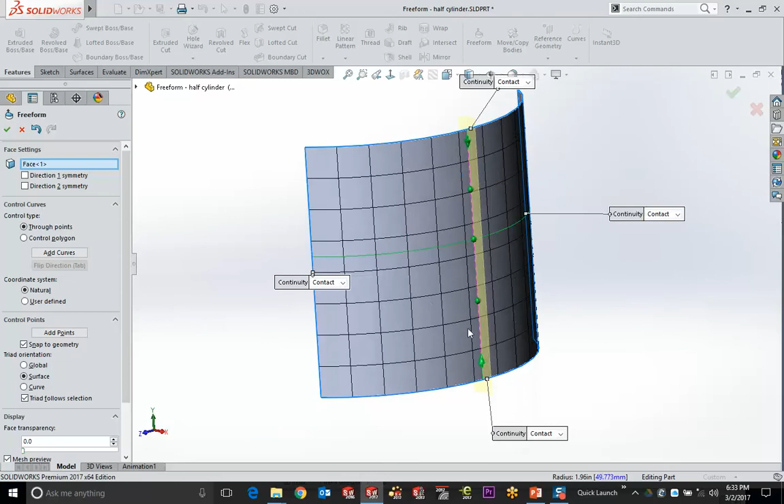Now, once those points are available, this is what we do with them. We just pick on them and pull them. And that's it. You can push them inward, pull them backwards, even change the tangencies for the outlying edge. Make it do anything that you want.

Everything I'm doing right now is staying planar. But one of the things I want you to see is that as I pick this node, this triad starts changing orientation. If I push it inward, it starts to tilt a little bit so that it's normal to the face that's there. Let me try to get it really changing. There we go, a little bit more.

You can set this up so that it actually stays normal to the surface, always stays XYZ right-hand rule, or basically changes based on the curve. That's just going to be an orientation that tilts and switches. But it does give you the ability to grab these nodes and go very specifically in a direction.

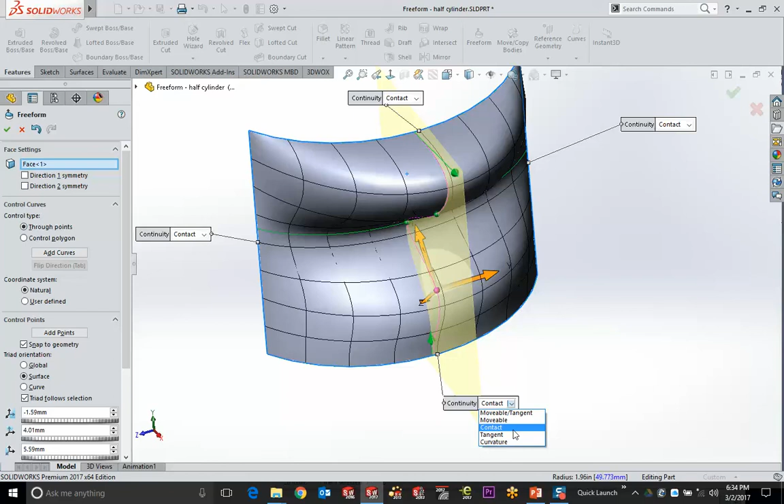Now, these edges also allow you to do some interesting things. Right here it says contact, contact, contact—that means it will stay in contact with the other geometry adjacent to it. But we can also switch this to be tangent or class A blending to that adjacent geometry, or physically movable altogether, which allows me to take it and change where that surface was actually attached.

So there's a ton of different things that can happen with this shape. In any event, it creates super, super complex geometry, which I'll turn zebra stripes on just so you can see what that looks like. But that didn't require multiple guide curves, multiple profiles, lofting, sweeping, any of that stuff. It's all just basic push and pull.

Now, in a real life example of where I would use something like that—we deal with, in this neck of the woods, not as many people as in other parts of the country, but doing product design. On the shop floor here, you have product design, but it's not consumer product design, which is more consumer-oriented, swoopy shapes, aesthetically pleasing.

Not to say that these beautiful stainless steel assemblies aren't aesthetically pleasing—they're actually quite elegant. But what we often do is have an art department, and that art department concepts up things that they then sell and throw to the engineers to make reality.

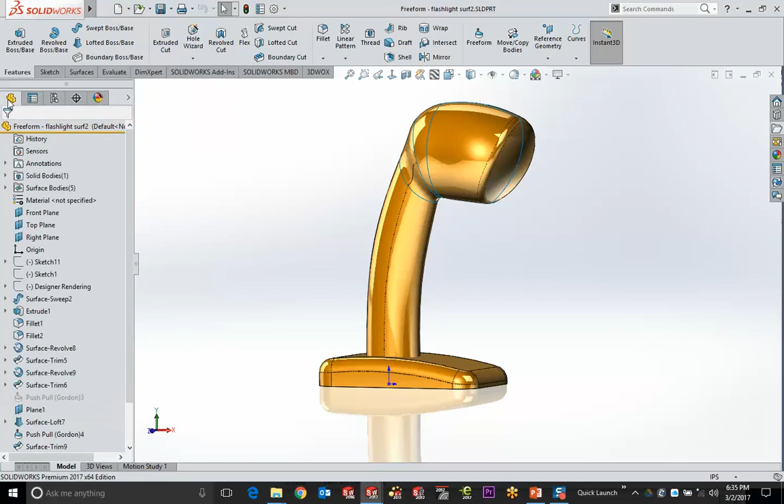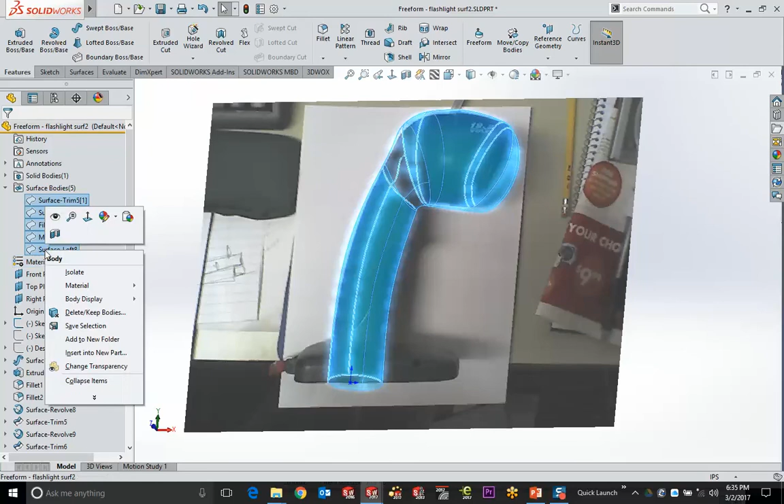So what I'm going to do on this one is use the freeform features to create a shape that maps the topology of what we see here in the image. It's again going to wash out a little bit on that projector, but you can sort of see that there's a button shape that we've got there.

So what I want to do is, on this face, run that freeform operation. Now, in order to make things absolutely symmetric, we can either snap it to an existing spline that's available to us, or I can just turn on this check mark here called symmetry.

And that way, as I start to place my cursor on this face, let's see if I can see that. To the opposite side of the plane, there's another curve being placed symmetric about the middle of this.

So you can see them coming together. Now I can take my cursor and go directly onto that plane, and it will put my curve directly in the middle of what we're talking about there as well. Kind of an interesting thing there.

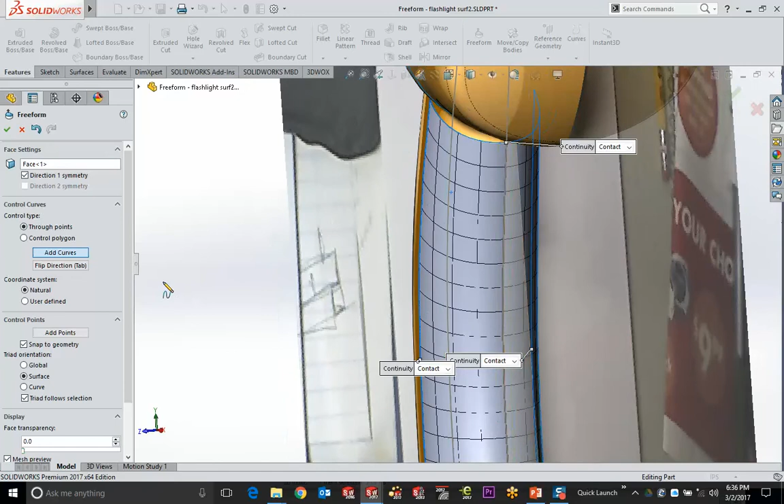Now what we also do is go ahead and add points onto that, and the points I'm putting on are indicative of where this handle might be. Once I deselect the points button and I'm no longer in the point creation tool, you can start taking these points and dragging them around.

That's where you can make this shape whatever you're looking for, follow and map that topology a bit visually, and make sure these outlining edges still have nice smooth blends. So I can call that class A, or just tangent, and it will be a parabolic blend between these faces so there's a smooth transition between the two.

The same can be done at the bottom, though those aren't joined, so we don't need any of that. What that gives us is some real beautiful and clean geometry that we can then join and thicken and turn into a solid. This happened to be a surface, but didn't really have to be in that situation.

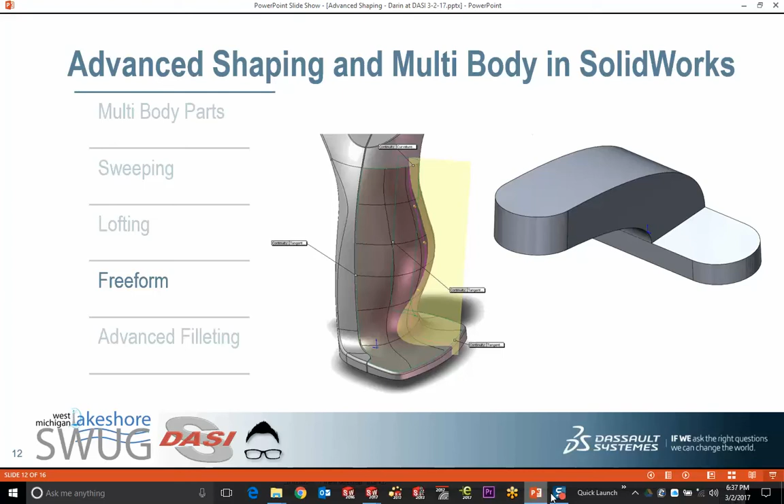Oh yeah, the faucet. This one here is pretty wicked.

Now, when you look at things on the surface level, features themselves are quite discoverable within SolidWorks. You might be able to muddle through this and start figuring it out, and the more times you use it, the better you're going to get with it.

But this is an example of something I never would have thought of with this feature here, so it bears note. I'm going to take what is a very prismatic looking part, and we're going to add a super organic blend to the side of it.

Now this has to do with the freeform tool, but what I would think when I pick freeform after what I've just shown you is that we're talking about a non-prismatic face. It's got a lot of blending to it, one side to the other. And if I add curves to this, those curves are straight lines, but I'm not just going to bump this face out or bump it in.

That's not really the goal. So what I'm going to do instead is change the topology and make this face blend smooth to the face that it's perpendicular to. Now you can do that without adding any points or guide curves.

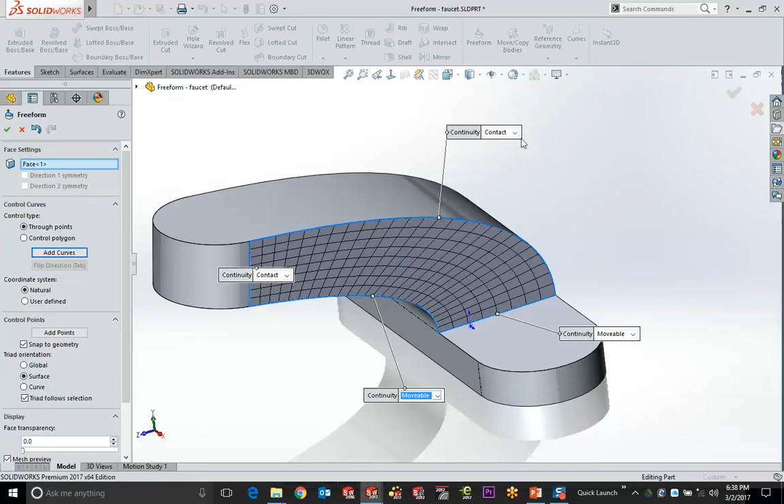What I do is take these control points and make them movable, or movable tangent. But movable is going to work for all of these. What movable essentially means is as I push and pull on this face, these edges no longer need to stay in contact with their original source. So as I go ahead and pick this edge at the bottom...

I end up getting a bunch of endpoints, which wouldn't have shown prior to that because it's not set to movable, so those endpoints and tangency points don't apply. But when I set this edge to movable, I get two endpoints and then a tangency point here, which allows me to change the way that face blends.

So what I like to do on this one is control-select all four of those - see if we can get all of them in there. And then when they're all selected, I can now move those directly off of this part. So I'm going to take those and kind of blend them and drag them around.

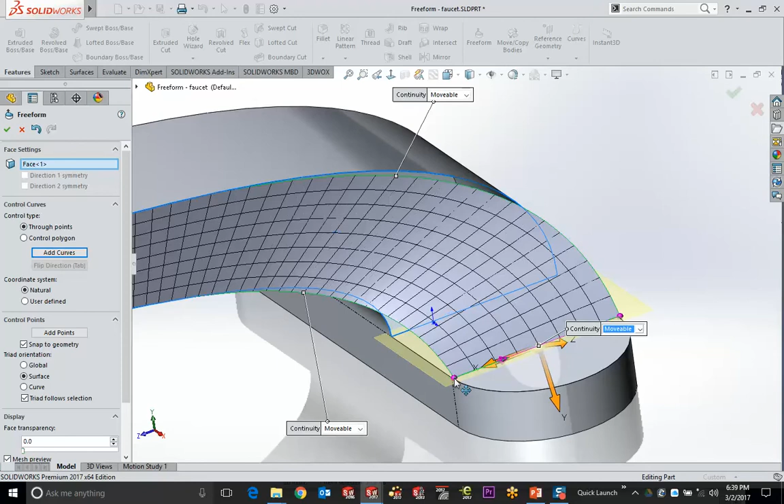Now these are selectable points. I can actually snap those to the end of the geometry. See how it's actually picking and snapping to that endpoint? Kind of crazy. So I'm actually detaching that face from the part, as you can see from the preview.

Want to make sure that this side looks pretty good. We'll snap that guy together as well. And then I'm going to take these tangencies, which are pointing this direction.

Let me get that snap back into place. There we go, I'm going to take this tangency. I want to start that over again because I made another mis-pick up there. Let's go ahead and get this one movable. I didn't want to move that tangency around prior to doing this because it works a lot easier if we just grab them before we screw around with that edge.

So that little node right there is the edge problem. I'm going to snap that back into place, but then we're going to take this tangency and just drag that around. Oh, crap. I do that just so everybody feels a lot like me. Wow, that was working.

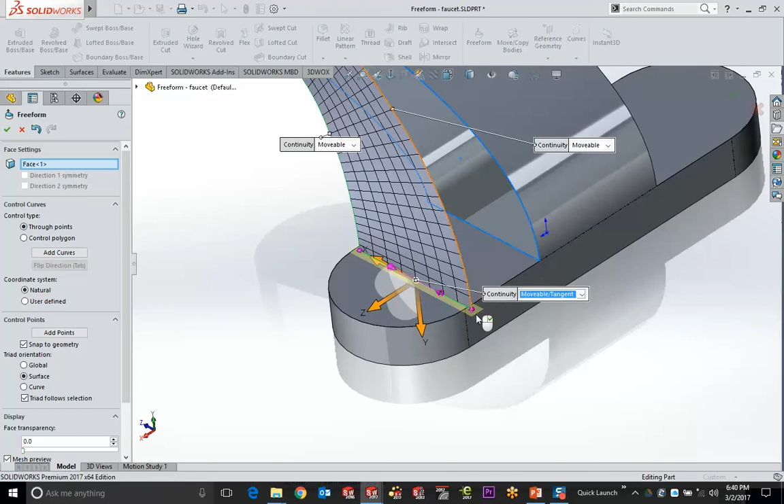Oh, that's the edge I want, I think. Yeah, we don't want movable and tangent. There we go. So I'm going to take that point and actually blend it over in this direction. Not quite what I'm looking for on that one, but we'll get these kind of pulled in and moved over.

So with that type of shape there, what we're really looking for, that's what I want on that one. Sorry guys, I'm going to flub this a little bit just to make everybody feel good about watching me do this. But the side edge is the one I'm looking for, that's the one I want. This one's making that bottom edge move.

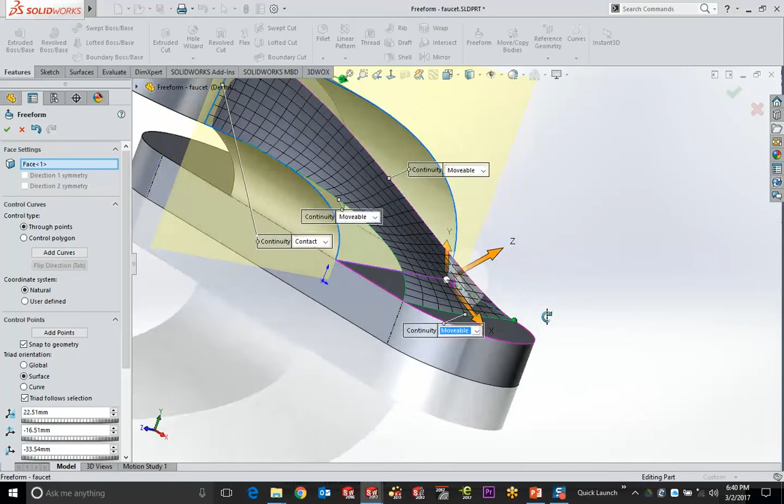This one I'm going to use to make the back edge actually snap together. So that's going to run that face out that direction. And then this one over here is going to run this face out in this direction.

Now, it isn't the exact same profile. You can see from the side it's not the same trimmed surface. But you have to understand when you're looking at a part, you're looking at an analytical surface that's much bigger than you see, and you're seeing the trimmed results of those. So when I grab this, this is what we end up getting now, this blend flowing around the side.

So without screwing this up, I'm going to do that one more time so you can see the full workflow on this. So the full face there, we're going to make all of these movable around the edges. Just got to make sure that we move the right contact. Once you have all those there, there are these 4 control points.

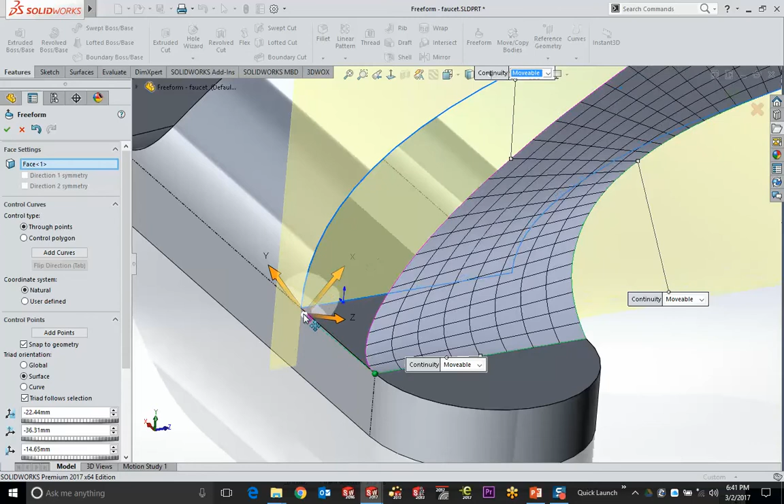So we'll grab endpoints and tangency control handles, and then we'll just go ahead and move those over. Now leaving these put, but picking the side edge is what gives me this handle, which I can now clip over here, and that's going to make that tangency linear along that edge. Same kind of thing right over here. Drag that one down, and then snap that guy into place as well.

All right, so again, same type of shape. You see the final result, and that's what the geometry does around there. Okay, much better displayed in that case, but it gives you a real good idea of the capabilities, that those edges don't always have to remain in contact.

So we've got a few more minutes left here. I do want to hit advanced filleting real fast because this is probably the one that you're all going to walk out of here using right off the bat.

So filleting has always been regarded as rounding, radiuses, ball bearings, tangencies between faces, right? Filleting is no longer regarded as just a quarter round or a radius. It's very parabolic or elliptical in nature when we're using Class A tangencies or symmetries or these nice drawn out types of setbacks. So I'm going to show you these 2 examples here because they're a couple of my favorites.

First example, I'm going to hit on this filleting tool. We'll use this tool here that we did in SOLIDWORKS 2017 because this is a really interesting one. I'm actually going to start this one off as a fillet feature, but for full disclosure here, so you're in a learning environment, you see this edge right here? That edge generally wasn't there, and it was added by putting in something called a split line.

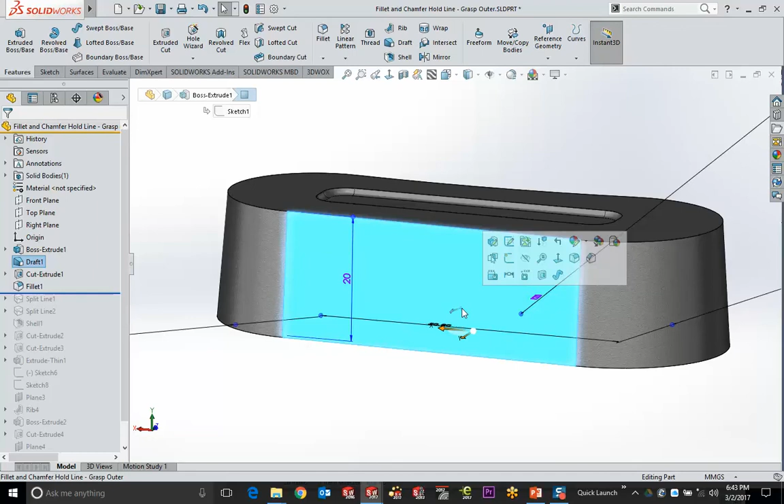Now split lines are there in a lot of cases. Any of you that do simulation might put a split line into place so you can pick a very pointed load or a pointed restraint on a face, because what I have is a full selectable face. If I put a split line in, which in this case is just based on a line sketched in the middle of the part, that split line then segments this face up into 2 selectable faces.

It didn't disrupt the topology whatsoever. In fact, if I show you this without hidden lines showing, you'll see those faces look perfect, but you'd never know until you dynamic highlighted or selected it. But that edge being in existence gives me a control point for some fillet blends that we have going.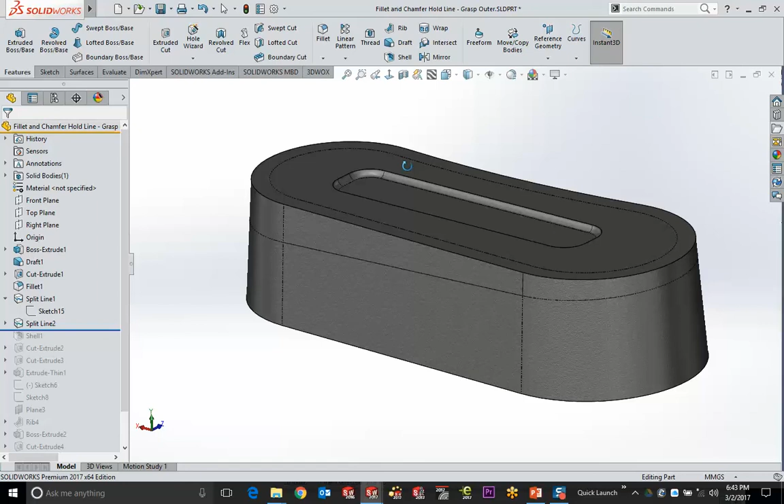So when you grab your fillet tool, what I'm going to do here is called a face blend fillet. Face blend fillets allow you to pick groupings of faces in two different directions. So if I pick a vertical, I don't even have to pick all the way around, it does it automatically. Then if I pick an opposing face up on the top, you'll see it will put fillets between those faces.

But what's really cool here is we have the ability to do this thing called a hold line fillet. Without typing in a radius, which is no longer defining this, I can pick the edge of the part here and the edge of the part here, and if I set this to curvature continuous, it gives us a parabolic fillet that actually goes between those edges. I didn't cut it, I didn't have to trim the face away and then loft between those, which is the way a lot of people have pulled this off up to this point. This is just the run-of-the-mill fillet tool.

Now the key is this curvature continuous, because if I have a circular profile, it can't possibly hit these multiple diameters over here, or multiple radiuses. But in this case, if I do curvature continuous, it draws that off to be more parabolic.

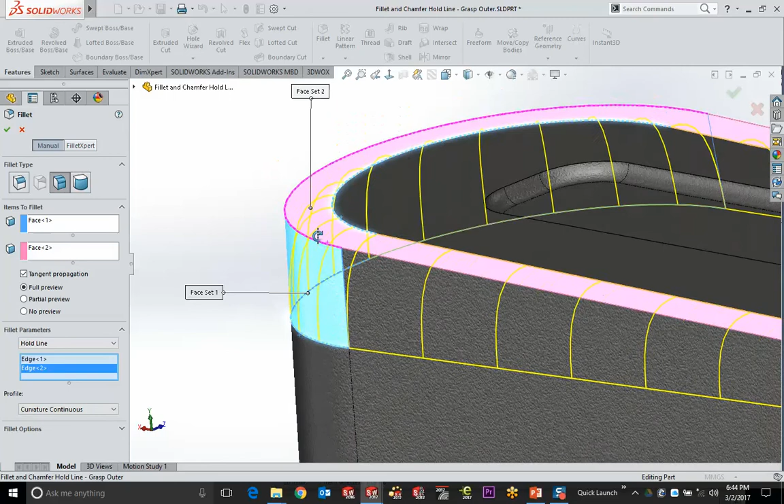Now, bonus instruction here, 2017 added a new feature that allows chamfers and fillets to be completely interchangeable, I guess is the best way to put it. If I pick on a fillet now, even an old part, and hit edit, there's a new button on the top that allows me to switch it from a fillet to a chamfer without changing the feature, without deleting the feature, without any of that stuff.

Now again, full disclosure on this, is it a chamfer now? The feature is still called fillet 3. Now the icon in front of it is a chamfer icon. If I pick on this fillet right here, which is a fillet 1 with a fillet icon, and go to edit and turn it into a chamfer, you'll still see that that's called fillet 1, but the icon is turned to a chamfer. The reason being, right now, and this may change, but for now it's the easiest way, is that feature names also drill down into the dimension names. And if you've used those dimensions for an equation or some other type of thing, by changing the feature from fillet to chamfer, you've changed the name, and now there's this trickle effect of things that break.

Now I'm sure eventually they're going to write it so it's associative, where if you change the feature name, then it's going to change the equations that are consuming that feature, but that's just a little bit more work to be able to deal with that. So cool though to be able to flip those and swap them from one to the other.

Now this is one of my favorite files to show just because of the simplicity.

Yes, sir. Back on your changes, yeah, chamfers or radiuses, that's only when you do a face radius, or face-to-face radius. No, because chamfers do other things. Chamfers can be just a regular distance based on an edge selection.

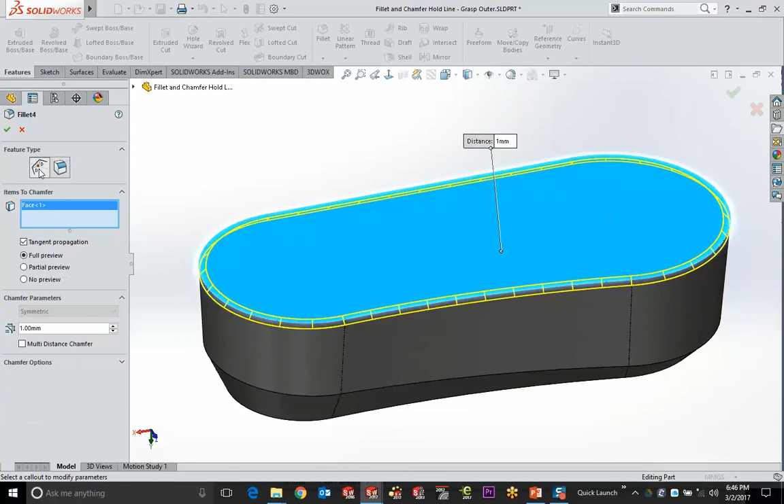So if you just do a radius of a fillet, I'll put one on this side here. I will grab the face or the edge, doesn't really matter. So if I just do a run-of-the-mill fillet, in this case it's 1 millimeter, if I pick on it and then edit it, you'll see right up here we can switch it. It'll just be a 1 millimeter chamfer in that case.

So we added the ability to do face blending chamfers, and... could be. You seeing one that's not working? Yeah, it was just a regular fillet or chamfer. You couldn't make it. Interesting. I ran into one. I'll do one more here. This will just be a run-of-the-mill chamfer.

So here's the different chamfer types. These are the two that were added, which is the offset face and then this face-to-face blending one. So that's just a run-of-the-mill chamfer there. Yep, that one's not doing it. The easiest chamfer ever. Okay, we'll make sure that that's the issue. That's what you're seeing though. Cool. Fillets will always be interchangeable to a chamfer, but that chamfer back, oh, that's an interesting one because that's a very basic thing right there.

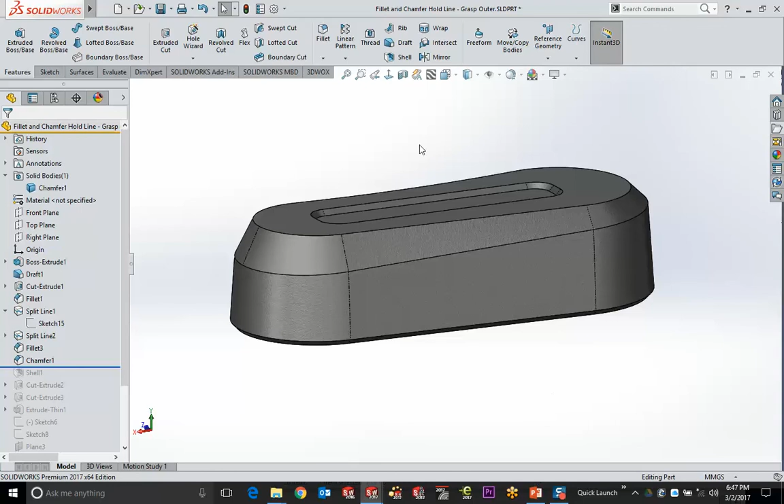Yeah, you look at that and go, huh? Everything else works with that? So that could very well be a bug, or it could have just been a limitation that they didn't hit. I'm going to definitely look into that one. It's quite simplistic, you wouldn't have expected that.

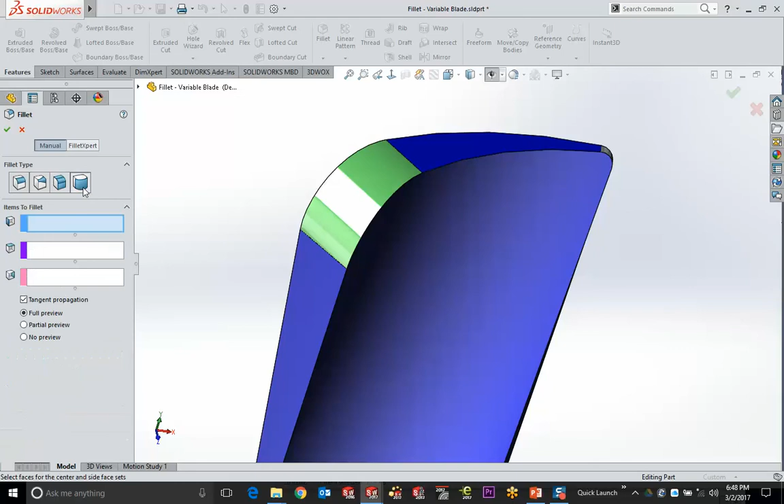With this freeform shape, there are two fillets I want to show that you get a lot of capability out of with minimal input: the full round fillet and the variable radius fillet. Full round fillet is geometry specific, so the geometry gives you whatever the radius happens to be, no dimensional input. When you go to the fillet tool and select the full round option, it creates a tangent-to-all-three-faces fillet. The faces and geometry determine things, so if I pick one face on the side, a middle face, and a back face, it automatically does those tangency blend radiuses from one to the other.

No, this is like a 2002 part, somewhere around there. Yeah, we had a variable radius for a while there. But that's one of those circumstances where you don't know what you don't know, and I run into that all the time. I got floored with something last week that I didn't know. It happens to everybody, which is great because there's always something to learn.

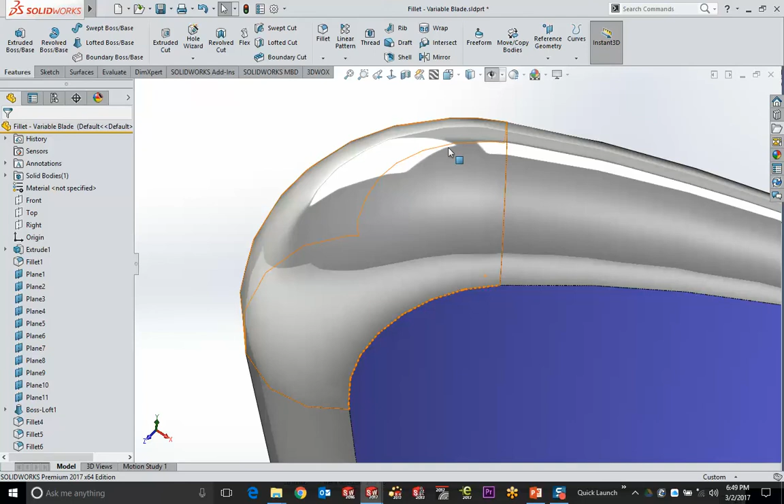I do this on purpose with this part because it's variable thickness, variable orientation, not just a straight extrude, so it's very much a smooth blending between all of those faces. In a competitive environment, I point out that in Unigraphics or CATIA, they keep a little seam right in the middle of that face because theirs isn't a full round fillet, it's two radius fillets touching in the middle. They don't do the full blend. By removing this, I'm removing that entire intermediate face. Usually those tools have to keep a small sliver face in there, microscopic but present for programming sake, and you'd see the seam going right down the middle. That one will change if the thickness of the geometry changes.

The variable radius fillet I'll do at the base of this feature, and it's all based on the edges you've selected. In the fillet tool, it's the second option, and it's a matter of picking multiple edges, with dimensional input at the endpoints of each edge. If I only select a single edge, since our fillets default to tangent propagation, you'll see a preview around the entire thing. With just one edge selected, by default you get dimensional inputs at the ends, plus 25%, 50%, and 75% dots that you can activate if you want.

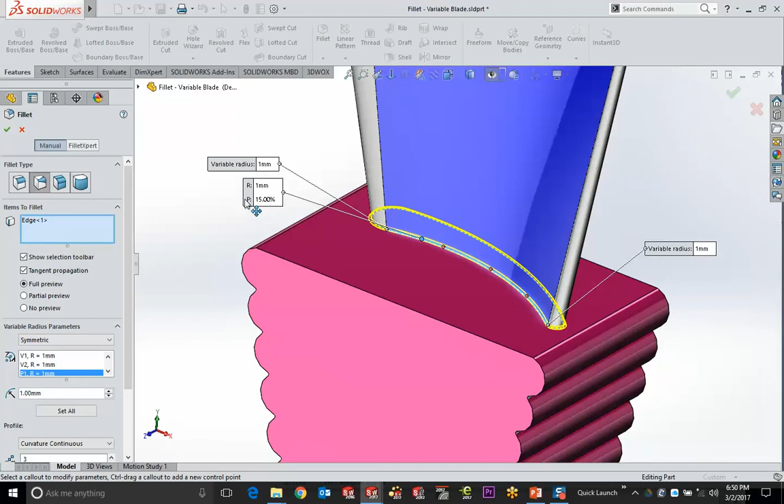If I want to put a radius somewhere, say right here, clicking gives me an additional dimensional handle based on where I drag it or the percentage along the distance I type in, like 15%. If I pick more edges discretely, this edge here, one in the back, and over here, I now get nodes at all the corners. So here we'll say 15, call this one 10. You get the previews here, and they're phenomenal. This is only 1 millimeter here to 15 millimeters right next to it. Pretty sweet. Go down to a 5 on that one, leave this one a 1, and make this one an 8 or 9.

The preview is exactly the geometry you'll get. It's going to be gray and look very variable, but you see how that blend works, tangent all the way around. When you pick the fillet, there are dimensions at every one of those nodes, so I could start dragging one around independent of the rest. It's a pretty neat operation that gives you some dynamic looking fillets for these purposes. Make that one a little bigger, it's too small.

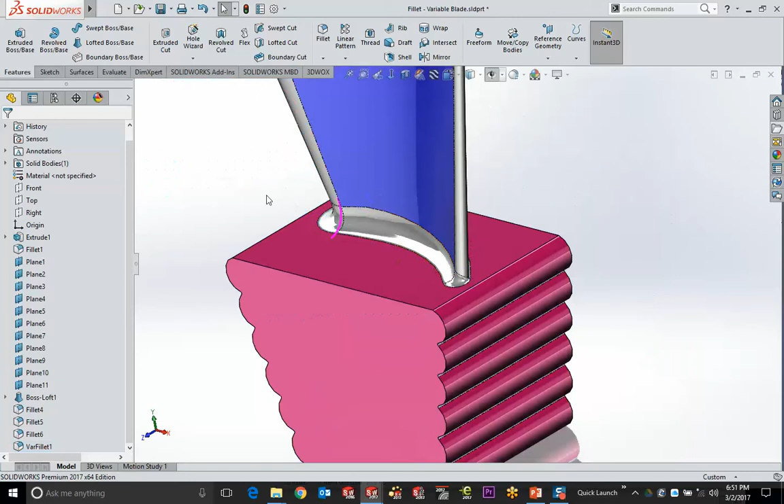All right, so that allows for some really super cool types of blends between each of those. Any other questions that you have right now? Everybody's coming out of the other sessions there, so yes?

Any tricks in moving your multibody parts around? What kind of trouble are you having? Tricks moving multibody? Something's out in space and you want to bring it back to the center. Especially round stuff. Yeah, there's nothing to pick.

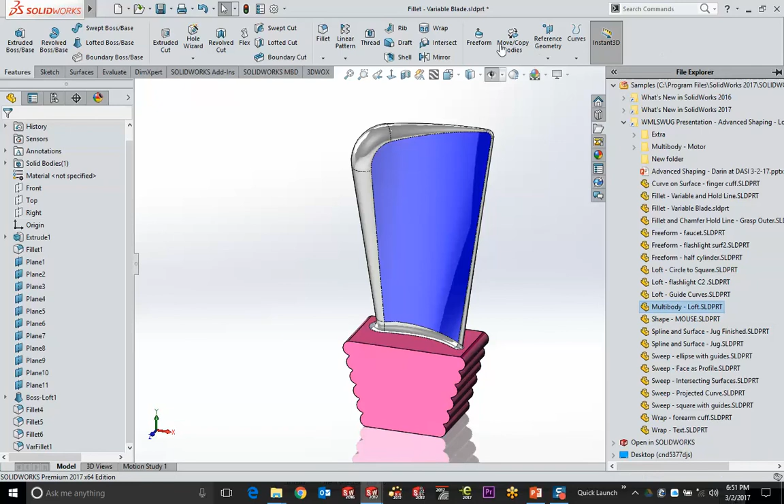The tool that I use often in those circumstances is the move tool, essentially. It's this move copy bodies function. If I want to move something around, you pick the body, you can hit move, and it will create a feature-based feature that allows you to move things around.

But what also happens is you have the capabilities. I'm going to do a copy just to get a second one here. But you also have the abilities when you hit move copy bodies to not just move them by translation or rotation, you can also mate them.

Now these are mates just like an assembly mate, only they don't add a mate, they just move things. So if I wanted to go ahead and take, let's see, mate settings, we'll take that face and make them concentric or coincident or whatever we want to do with those. That moves the part around, doesn't add a mate, but gets it to a spot.

Probably doesn't help you with what you're looking for, but if you have a point in the part and the front plane and you pick them, you can at least bring them to each other, or the origin.

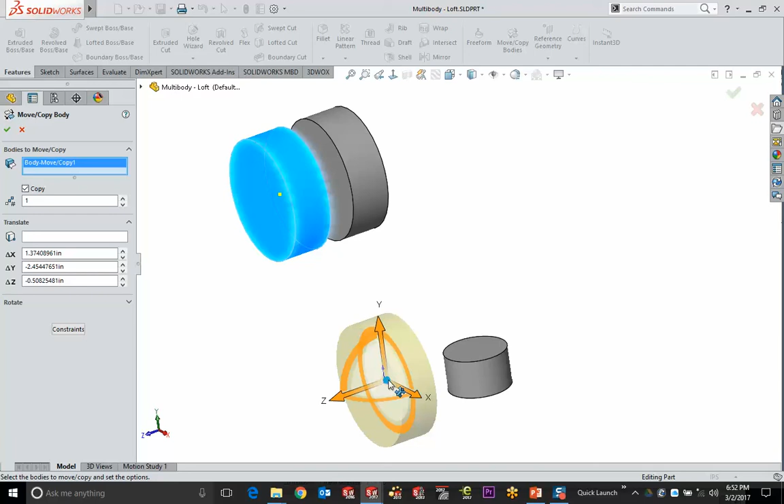Yep. This one to the origin? Yeah, I can move it, well, I can move that part of it. It's not snapping that to the origin. Yeah, is that my real origin? I guess that is my real origin.

Yeah, well, that one's copied the body. Sorry, I got to turn off copy. Yeah, that one's more of a freeform move. This is the delta, so this is only going to translate it from where it was, so not to. But you could mate it to the origin, but there's no points on this one, so you kind of have the same trouble.

There's no physical point on that, so yeah. Yeah, that's tricky. We should be able to. You could. I mean, that's extra work. I'm wondering if that face is actually going to move. I'm just throwing it anywhere on there right now.

Make sure my sketches are showing. Sketches are on. Okay. Didn't have my sketches showing, sorry. Okay, all looks good. So we'll do another move on that one.

Move copy body. Let's not copy it. And then in this case, oh, you're talking mating. Sorry. Let's do it that way. So we'll mate it coincident, that point. See, that point's not even selecting. Now, there we go. That's better.

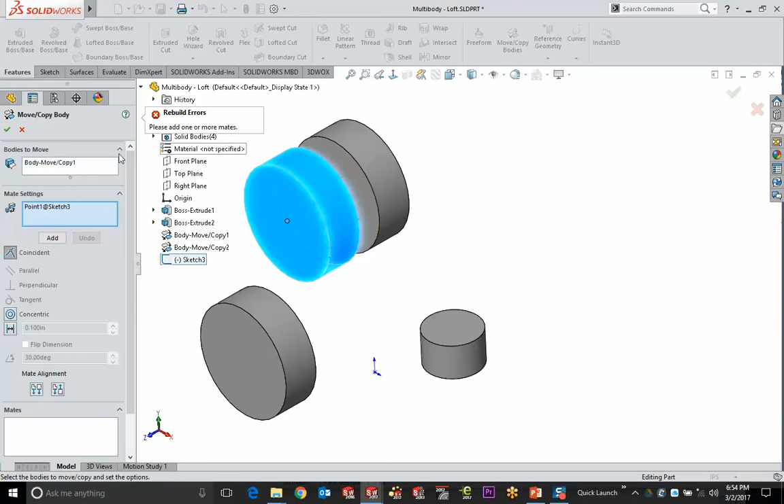Yeah, what's it tell me? Yeah, so the sketch itself isn't on the moving body, so yeah. That's a tricky one. Interesting, interesting.

All right. Well, the sketch isn't part of the body that's moving though, that's the problem. Yeah, I have to have some point on the body. When you have something that's round as a donut, there's no physical point. If it was rectangular, we'd have a vertex. That I could, yeah. But if we want to put a physical point there, there's no physical point anywhere on this to be able to mate to that point, so.

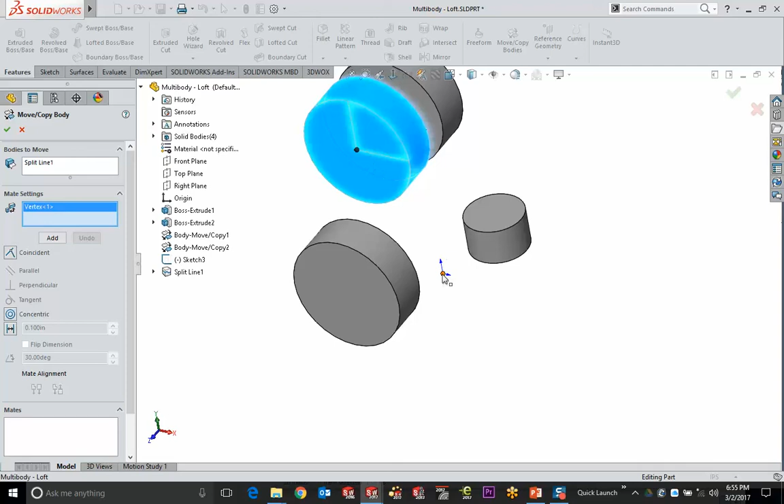Yeah, I mean, without disrupting it, you know, and coming in there and putting in, I'm just going to draw a rectangle. It'll be a silly thing, but this rectangle will create a split line on this one. So if I say split line on this face, that's going to chop it up now into two faces, and I can pick that point now, which is on the body, and then that point, and then those would work. So that might not be the most elegant solution, but it does give me something selectable there, and then that'll move it. So, but I had to manipulate the geometry a bit to get that to go. So I wouldn't call that the greatest way.